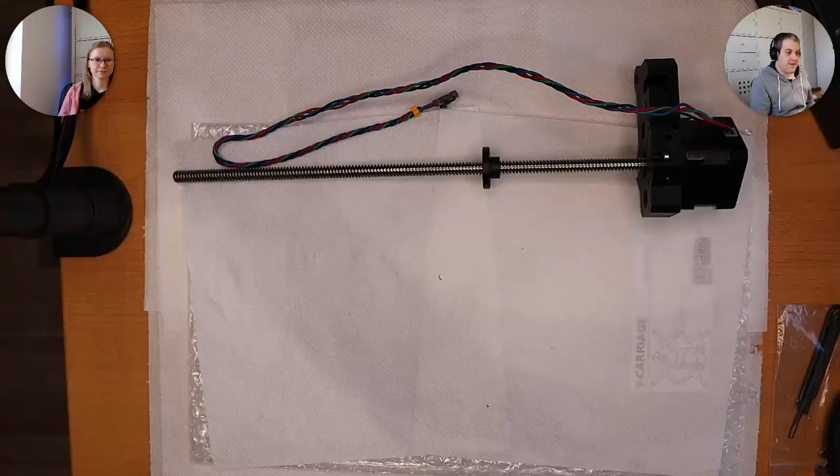Let me switch to the overhead camera, and let's take a look at what we have so far. I wonder if this is bright enough. Let me just do a little bit of adjustment. Where's my ring light? So we have some external light coming in, a pale one because it's winter time. But we left off with, which one is this? It's the motor, Z-axis. I think the X-axis is going to be a separate one.

We're going to show you the manual in a second. But yeah, we left off here after 7 hours. So I'm going to put this one aside for now. I'm just going to place it like, oh, you're going to grab it. So what we have assembled so far is all this.

So we have the conveyor belt here. We did a really good job at positioning and lubricating the bearings, so this one slides. But now because we have the motor here, let me just position this in a better place. Now we have the motor here and the belt moving the bed, or the piece that will hold the bed, is kind of difficult - you need to apply force to move this around. So I don't really want to do that.

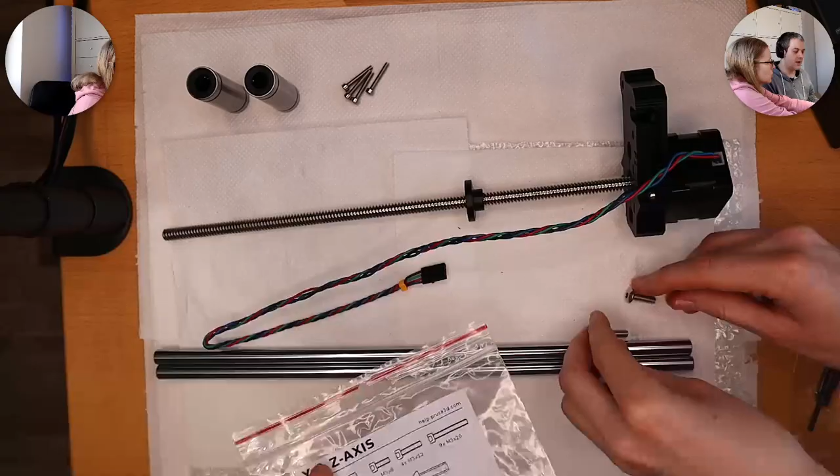So we're discussing the assembly, and at least they have these nice printed labels where the screws should be 1-to-1 proportion, kinda, except for this one. Yeah, this one matches sort of, so I think this is the one. I mean it has a round top, it looks like a Torx. But what the comments say is that they accidentally used these 60s instead of these 20s, but yeah, because they were not paying attention, but we did pay attention. So yeah, I think we only made one mistake with the screws. Okay, so that's it, you have... I think so. Okay, let me just close very quickly.

I wonder what people in the chat are saying. Can you do a refresh on the chat? Just wondering, this is so weird. So we do see folks in the chat. It's in the upper one, the dots. Flip. Okay, that's weird. Maybe they're watching the VODs.

Recording, yeah, okay. So we have the rods, we have the screws, and we have the bearings without lubrication. Okay, oh, these are bigger ones, longer ones. You have like 2 rows in each column. If you look inside, oh, the little balls. Well, these are large, oh it's 2 times. Yeah, it's not gonna be visible on the camera probably. Do you want to try it under?

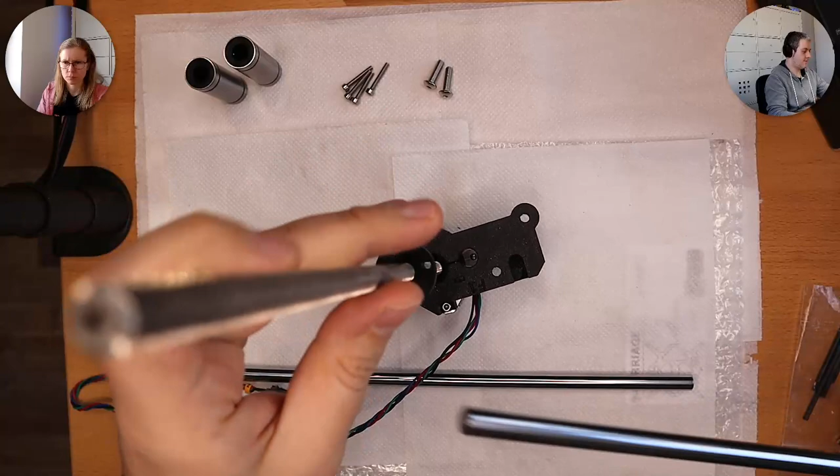Okay, so I need this, and then push it in. In case you find it difficult to insert the smooth rods, you can slightly loosen the screws on the Z plate bottom, and they fit perfectly in, then tighten it again after insertion. Don't forget to tighten them after the insertion. Oh yeah, I'm not there yet, I just inserted the rods.

Next picture. Look at the mini Z bottom from below and make sure that both smooth rods are fully inserted all the way down and touching the bottom.

Oh, we are not showing the picture. Let me just read further. Some early units may have a narrow version of the inspection holes. In this case, it is recommended to illuminate the holes with a spotlight for better visibility of the smooth rods.

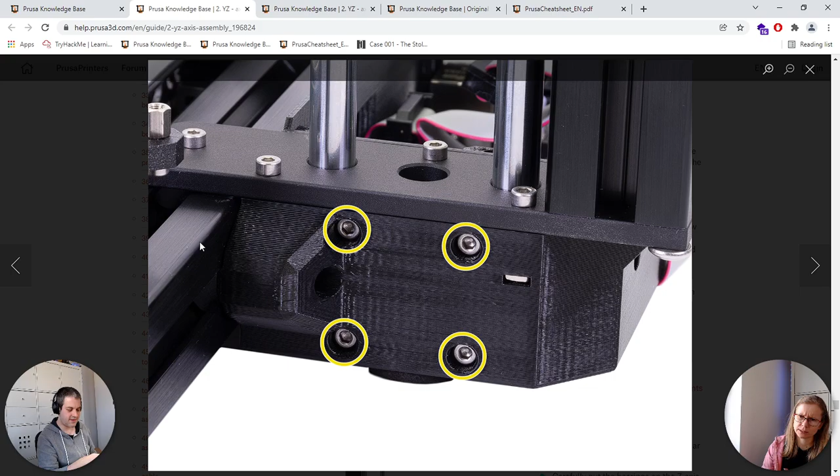So, yeah, let me just... No, but we don't have... This is the bottom of that box. I can see the PCB there on the side. This is not where it goes, this is the top. Okay, we should have inserted the rods in there. Sorry about that. Yeah, there's the PCB, look. You're not paying attention, you're my eyes and ears and you're not paying attention.

I said that's the plate bottom and that's the top, but... Yeah, but you never told me that I'm doing something wrong. No, I did not tell you, but I just wanted to spice up the show. You missed it too, admit it.

Absolutely, yep. Okay, so this is gonna be more familiar. This is gonna be problematic if I insert it in. So the inspection holes, I'll give you the camera. But I would be surprised if this does not feel like it's all the way in, like you can't miss it.

This is a little bit harder to push in. Do you want to loosen screws? What screws anyways, I don't understand any of what they're saying. I think these ones. Those are not holding it.

Let's swap. In the meantime, I will just read the comments, there are 23 of them. Yeah, so it must have been challenging for everyone.

After loosening the top plate, the smooth rods seem to still be catching just after the plate. Once I applied a little more force, it's sliding fine. But apparently it was too much force because it knocked out the thin bit of plastic at the bottom that it's supposed to sit flush against. If I just push the rods back up to the intended lengths and tighten the screws to lock them in place, should that be okay?

It will be fine. The crucial thing is to fix the rods against the side-to-side motion. I would say nothing is easy in this assembly. Even though this seems such a primitive and obvious step, boy, it's not.

There are 23 comments under the tab. I think this should be a clear indication to Prusa that something needs to be fixed here. I have this rod totally stuck. I cannot slide it in, and I don't even see why. There's such a tight place here for the rod, and I do understand it has to be tight, but it doesn't fit. I'm not even sure it fits the hole.

What else is holding this little piece here? At this point, I'm just so happy that we stopped the previous section before this point, because I would have given up this one easily. I'm starting to give up right now, because I don't see how this could ever fit in here.

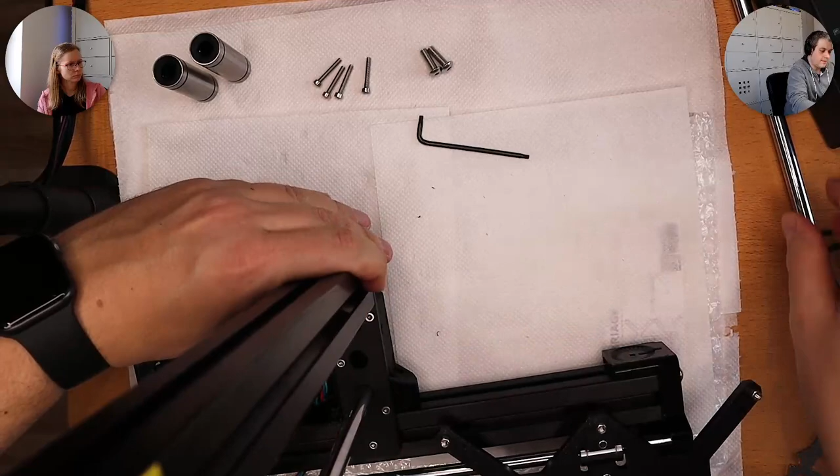It's not getting down, it gets stuck at a point where I should put it into the 3D printed part. So something is wrong with that hole. Why is it getting stuck? Doesn't make any sense though. It's almost perfectly aligned at this point. I don't get it.

I'm going to remove the plate now, but first check the hole to see if you can see the nut inside the plastic part.

Make sure the hole in the nut is aligned with the hole for the screw. If the nut is not aligned, insert a 1.5mm Allen key into the hole and center the nut with the key. I'm not gonna do any of that, I'm sorry.

I'm just removing the whole thing. I want to see if this even fits in the hole, because it's small. This was a large one.

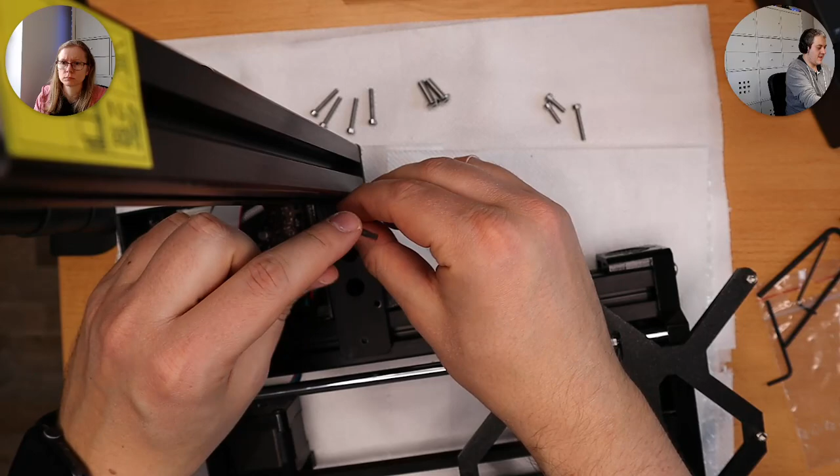Can you also find the part where we insert this plate? Because now I'll have to reinsert it eventually. I think I kind of got it - it's like a long one here, and a short one like this. I'm removing it just to see if the rod actually goes in here, because I think it doesn't.

It does. That is so weird. Okay, then let's try it a different way - what if I have the rods already in here?

The problem is, because of this part, you cannot just place it afterwards because you need to bend the plate. I'm not following. It's okay, I'll...

See, it's still stuck. It's so stupid. The plate doesn't go all the way in here. There should be a screw that pulls this plate in this direction. See, there's a huge gap here.

I'm not sure if you can see it, but there's a big gap here between the plate and the plastic part, and that's the amount that prevents me from inserting the rod. Very bad design, Prusa, very bad design.

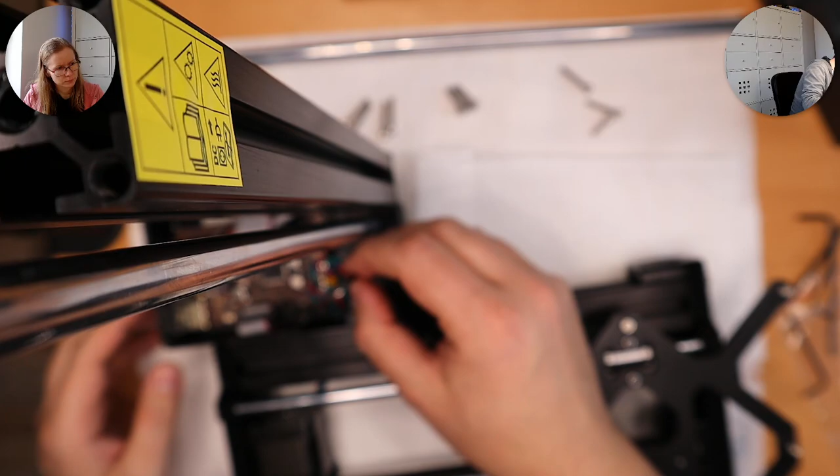What is the... I don't know. I have no idea what to do with this one. Sorry, it's gonna be out of the screen because I really need to insert this in.

You're turning a little bit, you'll be on the camera. No, this is not gonna be on the screen. Sorry, it's just a stupid struggle. I'm not gonna be able to show the move, but the twist... you are, because the other camera is. Okay, yeah, but everyone has to see it like in this angle.

So the trick is now it's really tight, I'm not even going to be able to think. So the trick is... no, don't remove it once it is in. No, it should be fine too. Just very hard.

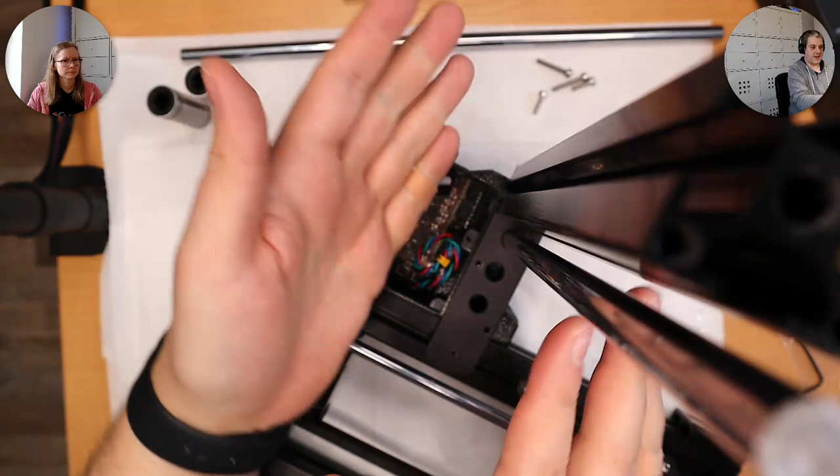So what I did is I inserted the rod to the point where it is just in line with the bottom of this metal plate. Then what you need to do, because of this screw here - well, you cannot see - there's this part, this screw, and you need to put this whole thing at an angle, so the bottom of the rod is aligned with the bottom of the metal plate. Then you tilt it just a little bit, snap it in place, and then push the rod in.

Okay, and now I need to screw in all these with the screw rods and screws there. Now I need to use a long one here, a long one here, right, a small one in here. And then I hope that this metal piece is still aligned with the hole. So the M3x12 screws on one side and two M3x20s on the other side.

Guess what, the metal moved. Yeah, no, it's good, it's in the right line. So this step - very disappointing. All right, we're going to screw back the plate into its previous position.

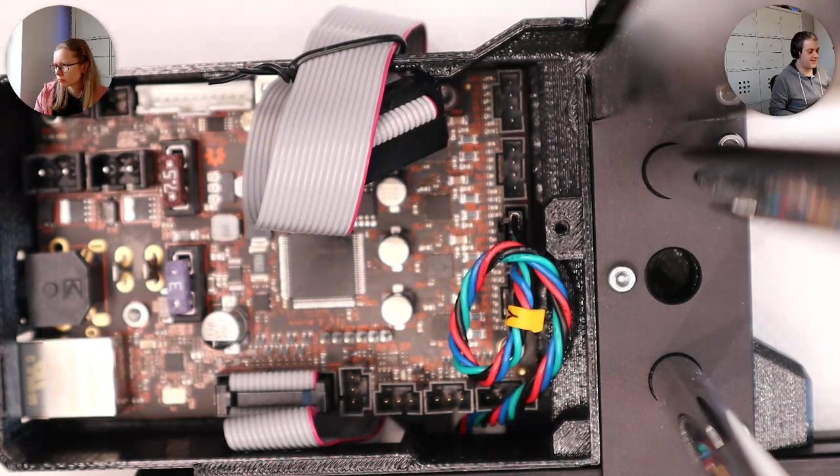Now this rod is so much in its place and so stuck. It's a bit blurry. Do you want to hold it and show it in the other camera? Nah, I mean, not everything has to be on there, but yeah.

Here, this is the gap that I was talking about. How about now? Oh, wonderful. So yeah, this gap is still there, and it's because there's this bottom screw for this metal piece here that's going to be holding the motor, and it's just not fitting there perfectly. And that little misalignment, it's only like 1 or 2 millimeters, but it counts - 2 millimeters is a lot for precisely putting it in place. So that's the difficulty of this step.

Maybe you should add a comment and tell them to align the rod with the bottom before you screw it in. No, I don't take responsibility for that. I think, is it like on the picture? The bottom - yes, you can see both of the rods.

Yes, can you please show that into the camera? You want me to show things to the camera all the time? It's not gonna be visible. Anyway, we're just checking what's in the manual. I do confirm. I just want you to look at it and check.

I can hold it. I can check it too. So just point out, please, what we were checking, because I can't do it on the camera. Where is it? Okay, yeah, I can see them. Can you see them? It's awesome, wonderful. I just don't want to have the screw falling out that I didn't put in place.

I think this step should have been done together with the insertion of this piece and the metal plate - it's way easier in that case. It's really like one little jiggly move and it snaps in. I think it's not even the design - well, the design is also not ideal because I can still see the gap, but it's more the instructions that I would change, like insert the rod together with the metal plate. It's gonna be much easier.

Loosening the bolts doesn't help because the screw here at the bottom is the one that pushes it towards that direction, not the screws here. Anyways, it's cool. Once it's in there, it's awesome.

Okay, and they are approximately the same height. We're starting to have a little tower here. Oh no, they are the same height. Yep, exactly. Okay, what next?

Screws. Oh, here on the side. The 20s. Yeah, but on these the four. Side here, yes, these big ones. Let me just check it. Look at the minis at bottom or from below and make sure that both smooth rods are fully inserted all the way down and touching the bottom.

Oh, we've done that. Am I doing this right? I use this Torx for almost every screw here - I'm not using anything else, just this one. Secure smooth rods with 4 M3x20 screws. Yes, the 20, the longer ones. And actually, this might also help.

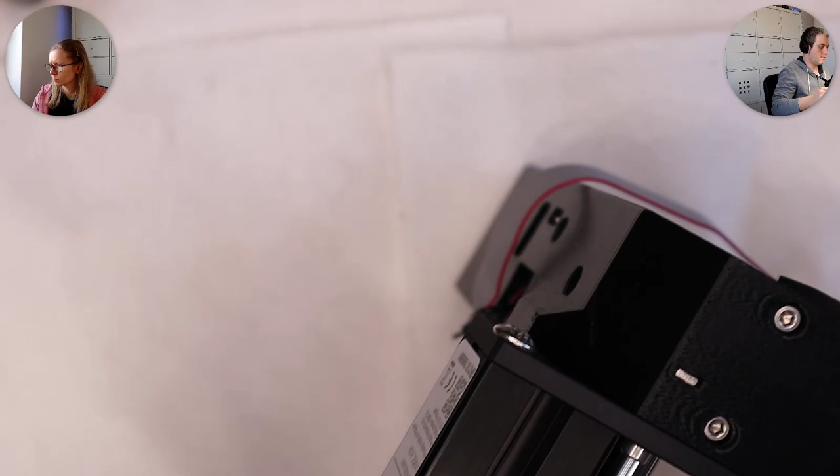This is not in its place. Let me know if you need a hand. No, good.

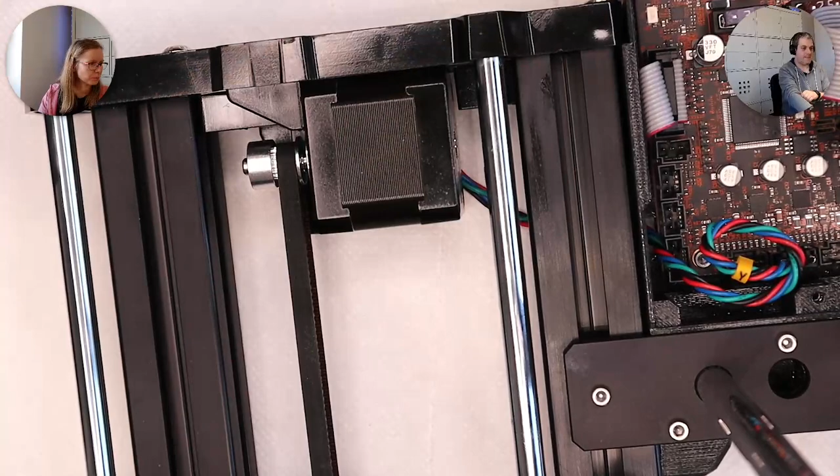How is it possible that even just putting in a couple of screws is... Oh, it is getting bigger. No, it's not plastic, it's just that they don't fit. That's not good. No, it's not.

I think I know what's the problem. Probably need to push these ones even further. Oh, this is gonna be very, very hard like this. I don't want to break this one.

Okay, I have bad news. We probably have to remove the plate again. Unless there's some sort of miracle happening here.

No. So there are these little squares. I think you are... for the follow. Yeah. Hey there, how's it going?

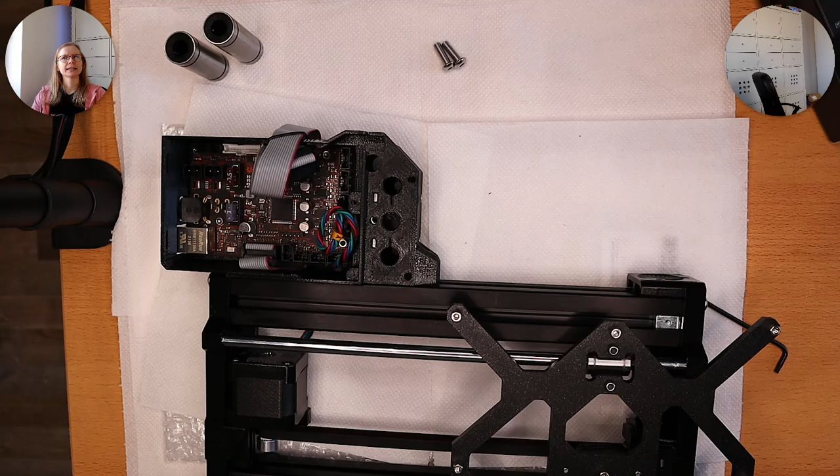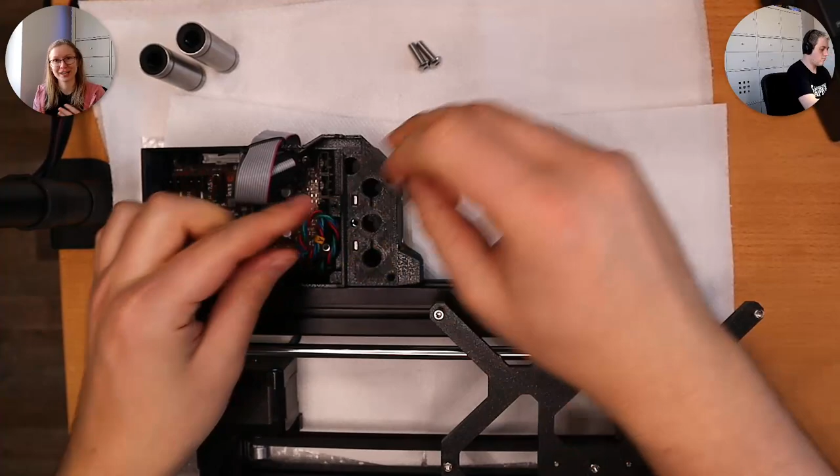So it was very interesting to include other experts of other countries, and those experts also took a look at the evidence, because apparently the Americans - both the Russian and Chinese experts - were also biased when they analyzed this conflict. The important part for the Americans was to make predictions of the outcome of the situation.

What was a very common issue, and I think that's also very human, is that when you don't know a culture - an issue with, for example, CIA analysts - for safety and security reasons they will not move to the country they are analyzing. So if they haven't been there or lived there before, they will not know the culture as much as someone exposed to it for a longer period.

This is why there are these biases, when we think, okay, what would we do in a similar situation? Cultures are different - spoiler alert, cultures are different - so you cannot just apply your mindset, your culture, your country to a situation.

And on a smaller scale, I think that applies very much to security analysts. From an IT perspective, if you're new to an environment, of course you bring your biases from your previous experience, but you have to keep an open mind - and it's easier said than done - for such cases.

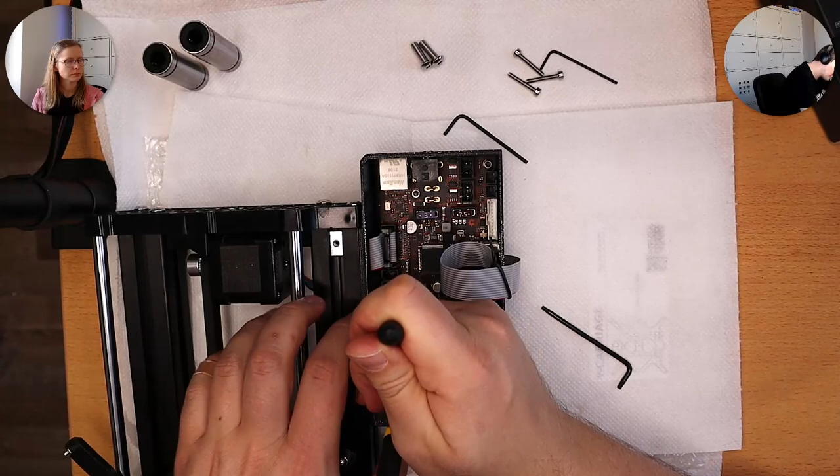I'm not sure, I'm just struggling here. I tried everything, now the screw doesn't even come out. So yeah, I'm pretty much stuck now. I don't even know what to do.

Then I keep talking about biases. In the book they say, if you think about it, it's pretty straightforward: your personal experience, what you've seen, heard, learned, is much more important than abstract data when you make a decision. The statistical data is probably more reliable, but we tend to give less weight to the statistical abstract data than to our personal experience. So that is also an analyst bias.

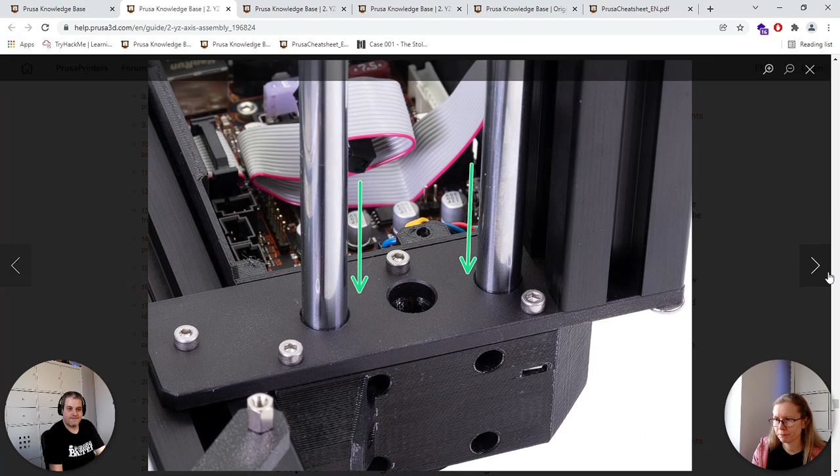Okay, now what? Let me just switch back quickly. So, yep, we've seen this. I'm not gonna turn it. Okay, the rods will stay here. The screws are properly in. They're okay, they're properly done. Okay, then let's move on to step 56.

Yeah, oh that is better. Installing the Z-axis bearings. So you should position your setup this way. Okay, so turn the Y Z-axis assembly with the rear side facing you. Okay, wonderful. Next, carefully put the bearings on the Z-axis rods and slide them down.

Does it matter what's the orientation inside? Do they have to be pretty much the same? Do you want me to read the comments? Yeah, because we have the lines here for the plate. We had to pay extra attention to align them properly. That's why I'm asking, is there any sort of alignment that I need to follow?

Not here, let me just check the next step. By the way, I don't get what's the reason why you have to align it so perfectly on the plate part, because those are little balls in there, and the rod should slide no matter what the orientation of those lines of metal. Okay, so it says balls in there. Slide the bearings to the upper edge of the smooth rods and hold them by hand with the other hand positioned. Okay, now it's the mounting. So no, I don't see any instructions.

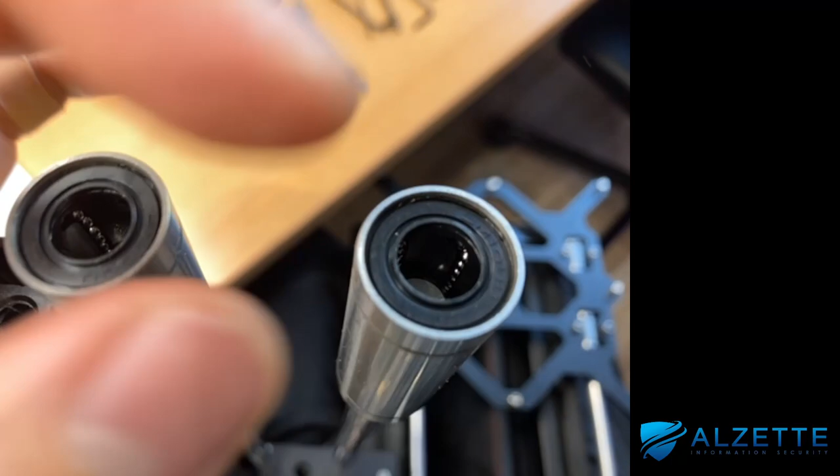You see the little lines here with the balls. So I tried to have them almost aligned the same way, and I just slide it on. And you can actually see how the little balls move here. Can you see that? It's so cool, can you see it? I think it's visible, kind of. So inside, you see how they move? Try to focus on it. As I move it, you can see the little metal balls moving there. It's not visible? I think it's there. Anyways, or maybe like this. You have to trust me on that. It's a little bit too dark. But anyway, so that's what we did, and the whole thing is on a mount now.

So that's... can you switch back to the documentation maybe? In the meantime, I will place my phone, and I try to untangle this cable. I need to charge my phone, so I won't be able to do it wirelessly.

So that's the idea. Do I need to just push them down or what? For the time being, yes, but then you will have to bring them back up to the top. I don't know why. What's the point of pushing it down? I'm not sure.

Maybe it's because we insert the platform motor or something. Look, I'm going to gently push them down. We cannot see it, it's not gonna be visible. Everything I do with this axis won't be visible, I'll have to show you.

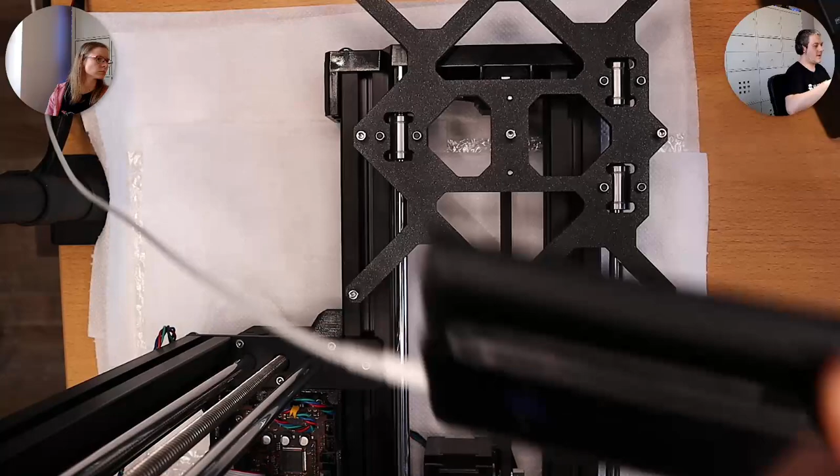Anyways, it's really about me placing the thing. Oh well, can you switch to the phone? So yeah, I can just turn the camera. Why, because you're showing my mess on the other side? It's fine, the whole thing is a mess. Look, that's what I call cable management there.

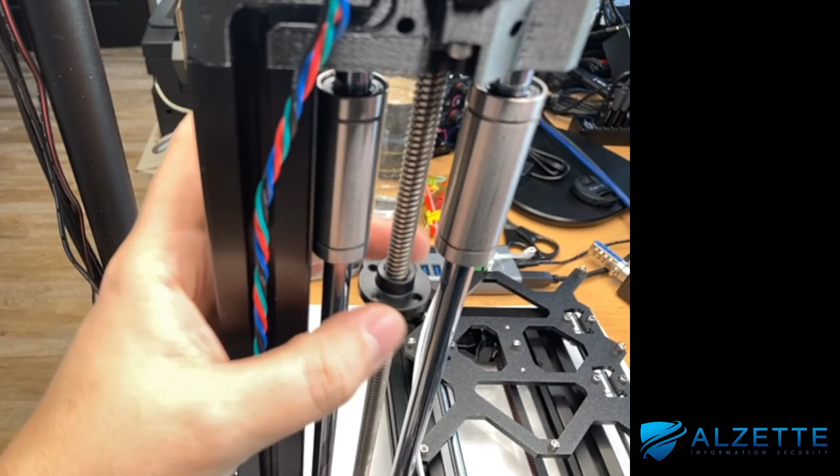So this is here, and we have the plastic thingy coming to the - is it supposed to be? You're supposed to put it - is it supposed to be like this? Put it on, look like this. Yeah, this is correct, like this.

So the two bearings are sitting on the plastic thing, there's no gap here. The cable is over here, and the motor, and everything is very dusty because we let it just be around. Sorry about that. So that's what I did.

Inserted - wait a sec, because it's still focusing - so inserted the rod of the motor. It's kind of wiggly, so I hope that something will hold it in its place on the bottom as well. And that's it, this is here. The motor position should be fine, and I think what will happen with the cable, because I see the gap here, it will go down here and then get connected to some of these.

So these are all for the motors, this will be the power supply for the motor here - at least that's my guess. Okay, let's switch back to the documentation, see the next step.

I will try to use the phone camera because the overhead one won't be able to show you all the steps. Okay, so we are done with this part: mounting the mini Z top assembly. Secure the mini Z top with the two 16 screws. Those two remaining.

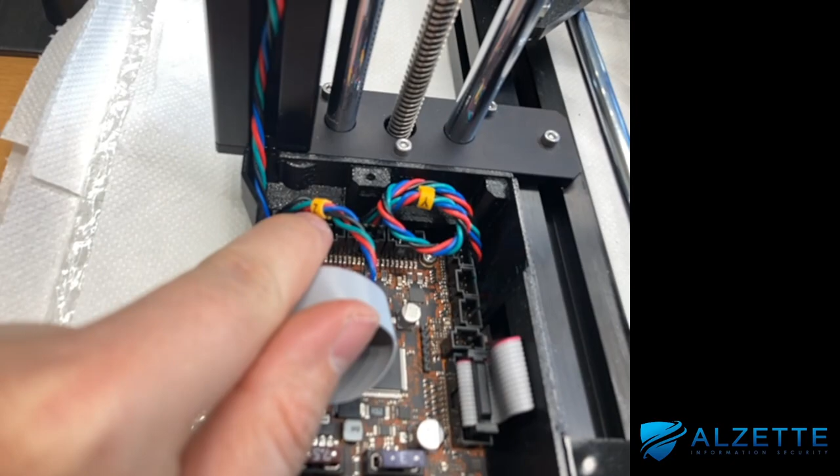Can you switch to the... okay, so there, it's not great, I'm horrible at cable management as you can see in the background. But we have it here, and I really like that they have a little label here, so it will be easier for us to identify if we need to disconnect the motor ever. Let it never happen, because then we need to remove the whole thing and get off this motor here. I mean, changing the motor shouldn't be that hard, we only need to unscrew these, and there's one on the other side as well.

Yeah, awesome. So the idea with this is to print a couple of the cases, so can you switch back to the documentation so we can see the next step, and protect the PCBs. That's pretty much the main reason why I want to have the 3D printer. And also some replacement parts, or maybe if we have a design for a tool and we need a plastic part or a case, then this will be great for that. But my main goal is really just print cases. It's pretty boring, but that's the security relevance.

And I think today it's kind of important to have, even though this is a hobbyist printer, I think it will serve perfectly our needs, at least for the beginning, until we get a better understanding of how 3D printing works. Okay, this part here, this has been around forever, and I really wanted to put it somewhere.

Is this to hold the cable in place or something like that? Let me just give you these two, these are the last two screws. Are we approaching the end of this part here? And then we have 6 more to go, or something like that.

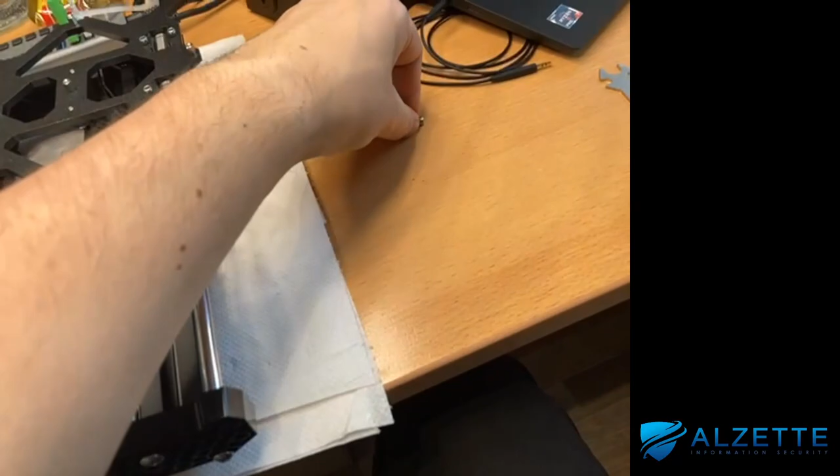I wonder why it's not all the way down, because it's kind of weird, it's only halfway there. And on the other side, you say there should be... no, look at this. Yeah, but that's the other side. I'll just put this down here for a second, and turn the whole thing around. Oh, like this.

Okay, so these two here, these two screws, these two holes will support these two screws over there. Okay, so I will just switch... the overhead camera, I think we're not going to be able to use that until we work on this axis. All right, any other further steps for this one?

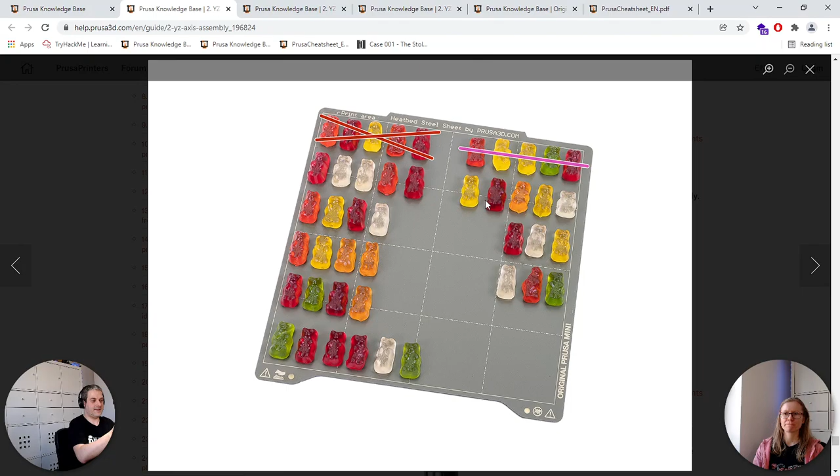Do you want to have a gummy bear? No, thank you. Oh really, just one? The red ones are the best. So what's your opinion, which ones are the best gummy bears? I like the red ones. These are the worst ones, the orange ones, just the taste isn't my favorite. And then the yellow ones are also cool. I'm not sure if I have to do the same color. No, you're only allowed to eat 5 of them, 2 reds, 2 yellows, and one green. One is in my mouth. I'll keep the red ones, most of them for last.

I wonder if gummy bears are also illegal in certain places, like Kinder Surprise. No, Kinder Surprise is illegal because you're not supposed to eat edible and plastic together, which makes sense. But I do wonder if this is a representation of the difficulty of our task. Oh no, so at the end... No, I think that's the final reward probably. I think these are the harder ones. We used a lot of components already, and there's only a few additional components here, so I think the next steps will have way fewer components, hopefully easier assembly. I don't know.

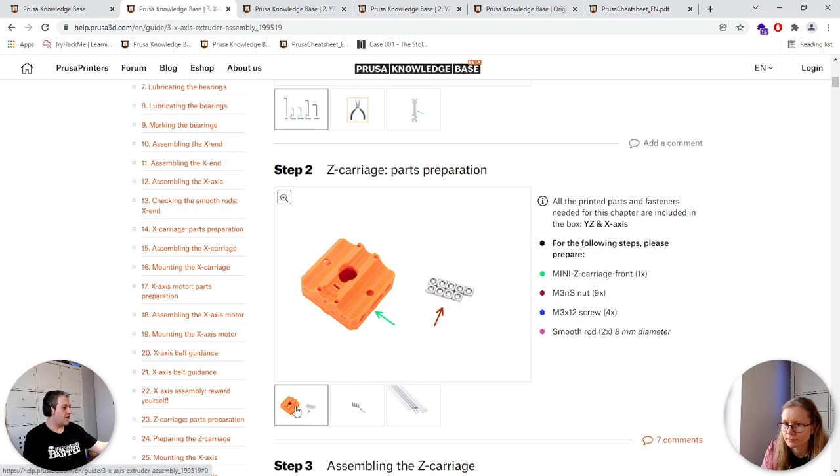I still don't get how this one works though - what is that? That's the y-axis, the z-axis rod. I still don't understand how it's going to be fixed here, because it's still a bit loose. We'll see.

I also don't really see how - maybe it's the x-axis that will hold everything together. We'll see. Or maybe it's fitting like this. My guess is we'll see it in the assembly, but I think these parts here will go for the big bearings, and then it holds everything together.

So you will end up with a high understanding of the functioning. Yeah, that's what we are aiming for. Next printer, I'm just gonna buy it assembled.

If you're ever going to have another printer, a Prusa one or anything like that - well, maybe if we go with the larger one, they have the Mark IIIs, that's more professional grade. This one is more of a hobbyist printer, and like I said, I think it's gonna be just fine. But the next one, I'll definitely buy it assembled. This is a lot of fun to do once, like playing Lego, but yeah, next one, I'm definitely not doing it myself.

Okay, here. So, which time zone are you in? Yeah, we're in Europe, so Central European time. For us it's 2:30 in the afternoon.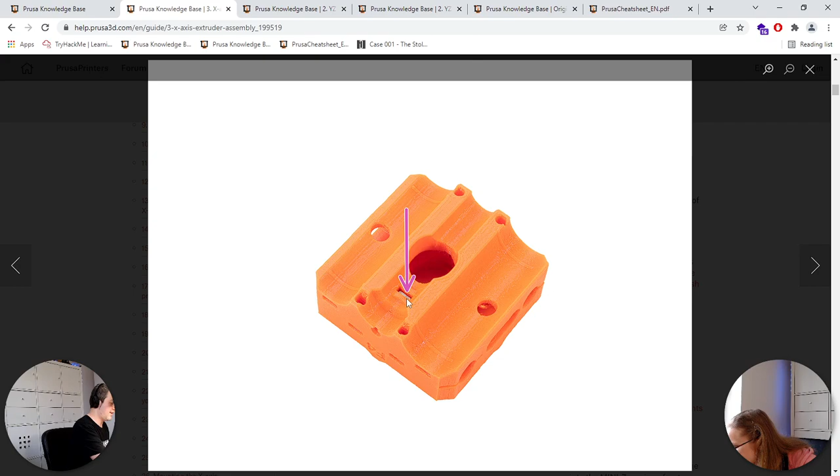I see the mountains through the window and the sun. That's good enough for me. I'm not so much an outside person.

Oh okay, it must be wonderful. But still, if you ever feel like going outside and enjoy the weather. For us, it's the summer that is hot.

I'll do the insertion while I'm talking, and then you can see it. So all these paper towels, normally we have either a solder mat or a gray mat, but we were warned that there will be some more lubrication involved with the bearings, and I didn't want to mess the whole thing up. So we just put some paper towels, and I use one of the bubble wraps here for the Y carriage to have a nice, not too hard surface, so I don't scratch the metal parts. Okay, so I start with this one here.

Look at the cut, this is so good. So I have, I think, 2 different kinds of orange filaments. I'm gonna print everything in orange because I look at how awesome it looks. So we are orange, and Hungary.

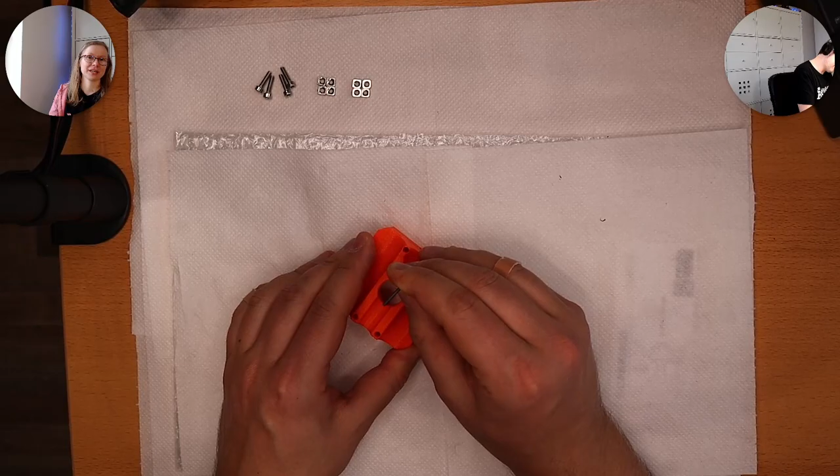Normally we have 4 seasons here, so winter is cold and summer is hot. And in between we have spring and autumn, which is very nice. But in recent years, summers have gotten hotter and hotter.

So insert 4 nuts in the top side of the mini Z carriage. I think it's front, this one. Yeah, because that whole face faces downwards here. But okay, and the next step is to do the same thing here as well, isn't it? I just want to see all this. Yep, so insert all 8 of these here. All right, that's all I wanted to know.

Thank you, because this will take some time. Okay, then sorry for interrupting. No, go ahead.

I would love to go there when it's cold. I've never felt anything below 17 degrees. Wow, obviously I don't know snow either. Snow is fun, 11 degrees below zero is not fun. So we had that last week, and it just hurts.

It hurts, so even if you wear gloves, for example, we went out for a walk, and I only wore my city gloves instead of my ski gloves. So after a while, you just don't feel your fingers anymore, and you try to move them to get some blood moving in it.

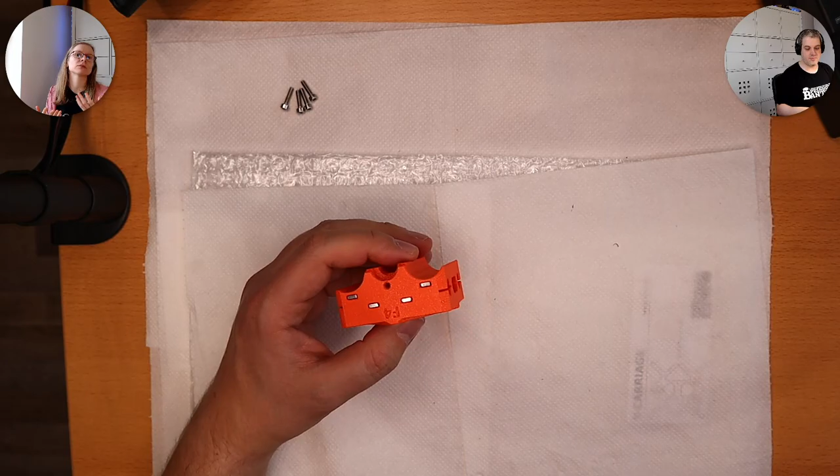You can get completely fresh water from underground, but we don't live in that part of the city. Those people are very lucky; they have great water. But I think we get it from a river, so it's artificial cleaned water, not directly from the source. This is why the tap water is still drinkable, but it doesn't taste as good.

I drink the tap water, I think it's perfectly fine. In Hungary, I think the tap water quality is pretty good, but they put a lot of chloride in it, so you have to wait a couple of minutes so it becomes transparent after it's white.

Okay, I have all these inserted. Anyways, just to finish the story — we pull off, we see no one around, so we're like, yay, we're gonna be able to fill up the water bottles.

And then 2 cars just roll by. Everyone is like, oh no, quickly. And I'm the fastest one. We already been there once, he was already laughing about this, but I don't want to waste more time because we still have to do some shopping. So I jump out of the car, get in the trunk, get out 2 of these plastic cans, and I rush to the source.

This happened just last week. In the mountain and the forest it's quite cold, and around the water it freezes. I do know that, but in this big rush I didn't pay attention. And it was already dark, after sunset, so very dark.

I have 2 of these plastic cans in my hand, rushing over there, and I slip. I couldn't even roll out of it because I have these 2 plastic things in my hands, so I'm just like a frog. And I scratched the skin off my hands, so that's why I don't want to show it, because it's quite ugly.

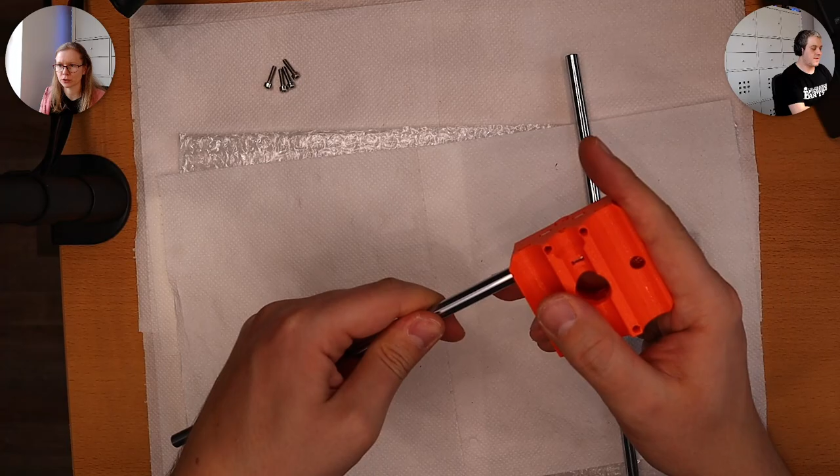Okay, I'll let you check the next steps for me. Here, these are with the rods, just let me know what needs to be done. So read the instructions please, and then carefully slide, see both what's there, smooth rods all the way into the mini carriage. Yeah, silently, because then I won't be able to explain.

Okay, thanks. So on Mondays we do more blue team related topics. Yesterday we did the DFIR Madness Stolen Szechuan Sauce case. I don't know if you heard about that one. It was done by a DFIR professional, James, and he was kind enough to create this as a community resource.

So you can download the case files and do the analysis. Yesterday we did the PCAP, and James saw the Go Live advertisement on Twitter, so he also jumped in and looked at the last part of it, like the last hour or so. This happens way too often, so next time I'll reach out to the person that created the project or resource we've been working on or plan to work on. I actually wrote a direct message to James asking if he wants to come for the next stream and get into a call and explain how he did it, why he did it, things like that.

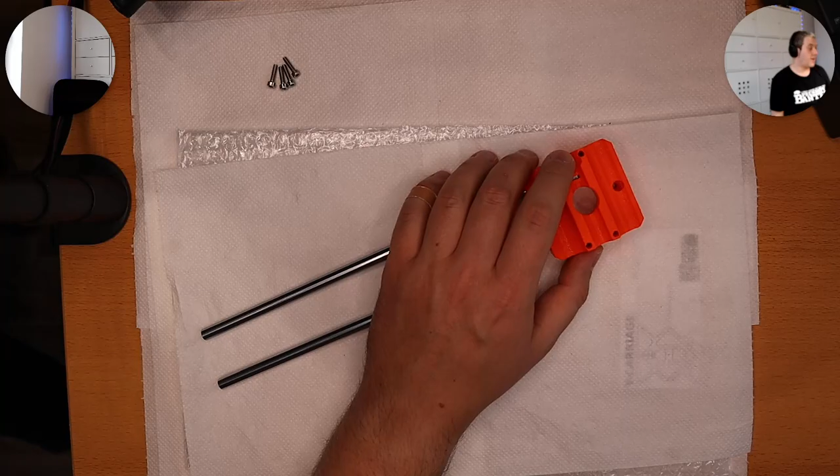Then Wednesday, so tomorrow, is more Red Team or CTF kind of stream. We've done 2 so far for Flaws. It's a CTF game, online cloud CTF, created by Scott Piper, who's a very well-known AWS professional. He created these 2 CTFs as a challenge that you can take and learn about AWS security. I think the VOD is still under the videos on the channel.

And then Fridays are more hardware, either hardware assembly or hardware hacking. We haven't done that much hardware hacking yet, but for example in the one before the last one, we assembled 2 little Wi-Fi devices. One is a Pwnagotchi and the other one is a Pi Sniffer. The video should be still up and you should be able to watch it.

We kind of try to keep the schedule. There's also one because we're Hungarians and we want to also give something to the Hungarian security community. On Sundays, we do a very beginner-friendly stream, doing some very, very easy TryHackMe paths in Hungarian. So that's pretty much what we have.

You can see the schedule for the channel, and we try to include it in the title of the stream if it's blue team, red team, or hardware related. Last time we did start the assembly of the 3D printer, and we need to catch up with the schedule, so we have these additional bonus streams for today and also on Thursday. Usually Thursday and Tuesday are our day off when we do other work, like running a security consulting company, and that's where we mostly try to catch up with the hours we spend on streaming.

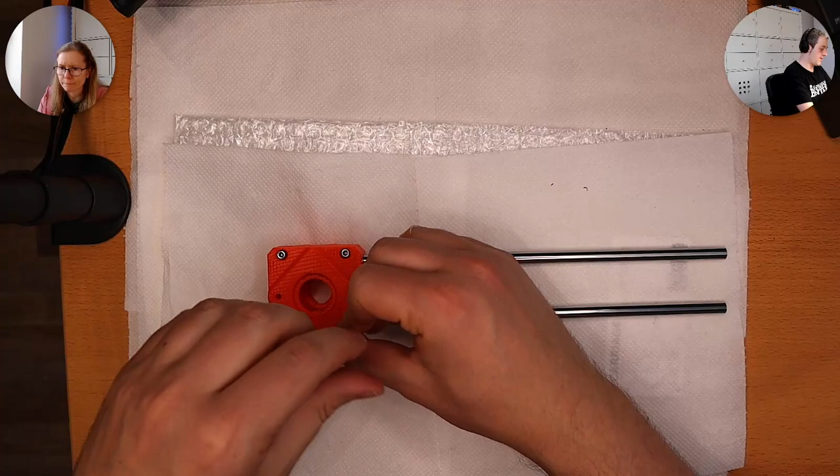How are we doing time-wise? It's almost 3 p.m. Okay, that's not bad, we still have like an hour. Afterwards we plan to go out to the forest again, and before that we have a meeting - there's a project meeting.

In the meantime, I will just collect the screws and nuts for the next step. Yeah, that's a good idea.

I do like this color, it's really nice. I think you can pick what kind of color you want, and I picked the combination of black and orange. So nicely, I don't want to tighten them too much.

Oh, you're already done. Then I will switch back. You're so decent. Oh, the list continues in the next step.

Need 4 of the 12. It's interesting that some of the 3D printed parts have a lot of these little threads, almost like hair, and some of them don't. I think it's different printers used to print the different parts, and maybe this printer is not set entirely well.

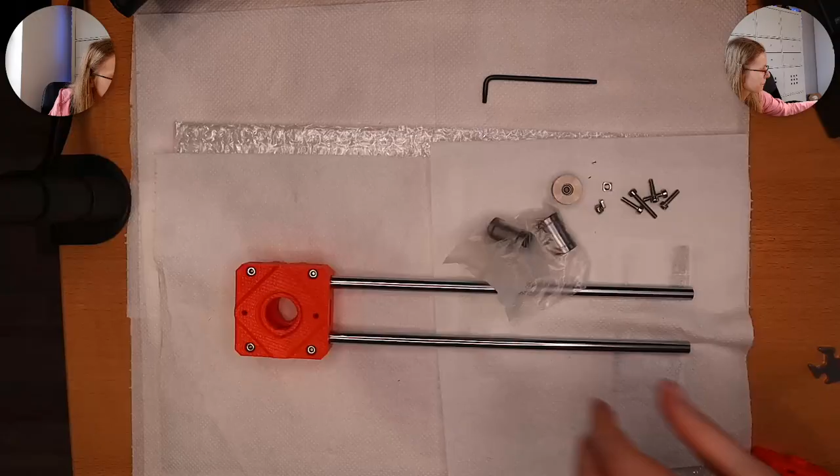Each bearing must be lubricated before mounting on the printer. Follow these instructions carefully. Let me get a bearing and a couple of these paper towels here, because last time we did these - do we start with the bearings and the lubrication? I'm afraid so.

Use any piece of fabric to protect your working surface from grease. Make sure the bearing is clean inside. Wipe the preservative oil off the bearing surface with a paper towel. It is necessary to lubricate all 4 rows of the balls inside the bearings. Actually, with other bearings, we've already done that - we started the whole assembly with that, so now we know that.

What kind of permanent marker do they need? I have a couple of these here. We don't have a picture of that - is it just like a thick one, a thin one, blue one? I have 3 of these, I can read the comments. And I also have somewhere an actual Sharpie, I just don't know where.

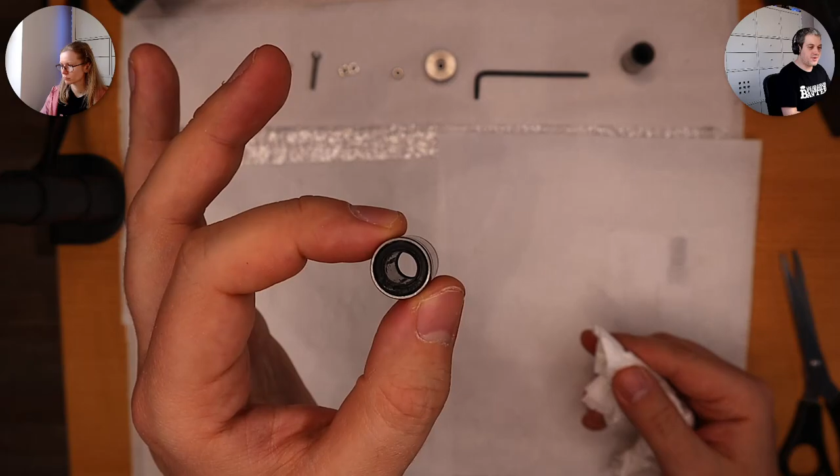So I need to clean them first without hurting the little balls inside - those little metal balls in a row, you have to push really aggressively. Some of the people commenting here managed to do it differently.

I mean that in the description in the assembly guide, some people managed to complain that they pushed it. Apparently, if you lose one or two balls, the printer should still work okay. After that, you should just order a new bearing.

But a good thing is they're probably very prepared for this. Maybe they should put an extra bearing in the package. But these are probably one of the more expensive parts, because manufacturing these is probably a more difficult thing.

It requires, I think, a special assembly line. So this is, I would say, good enough.

Most of the oil is gone, but it's kind of a weird step because you remove the oil and then you apply the lubricant. So it was greasy before, but it's very important. Why do I have to do it again?

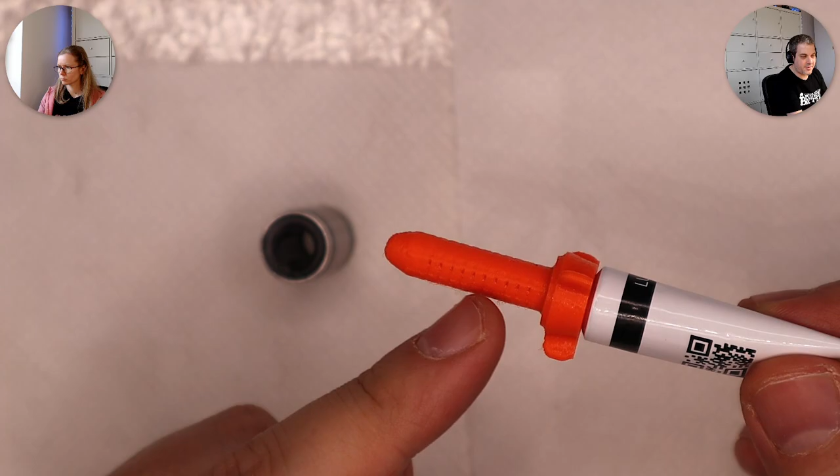I just slid in, I can show you. I need to align this pretty much with the holes in here. I'm not sure if you can see it, but this applier, or what is it called, has these applicator holes in here, and it's kind of hard to show it.

You might be able to see the row of these metal balls, and I kind of have to insert it so they are aligned, because the whole goal here with the lubrication is to have these two aligned and lubricate the little metal balls here. They really should have picked a different color.

Well, I will try to - sorry, I might have to do this off camera because I do it precisely in a way. It's a turn with the tube and applicator clockwise until you feel a slight resistance. Clockwise means the holes in the applicator are aligned with the ball row.

Okay, so then it doesn't matter how I do it, because this one turns a little, and then this is stuck now, so I can just squeeze, I guess. Gently press the tube to push the lubricant into the ball rows. Some material is coming out around the applicator here eventually.

Look at the front of the bearing. When the applicator pushes the lubricant out around the black gasket, stop pressing the tube. Hold the bearing with the other hand during the lubricating. The grease must be spread evenly over all 4 ball rows inside the bearing.

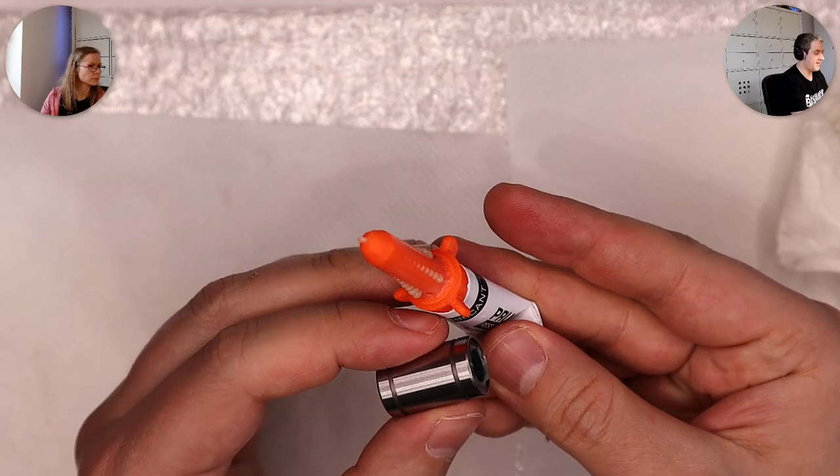Now this one will probably have way too much on it. Yeah, oops, see? This is what I did the first time. It's a bit... I wonder if I should pull it into the other one and just have like... Yeah, because we can never have enough. I can always wipe it.

The other side, just a little, and I will just clean it up on the sides. This one too, yeah, I think I just pushed way too much. Yep, it's all over the place, a little bit. Another one. And when I place this rod on it, I'm probably gonna have even more coming out on the sides.

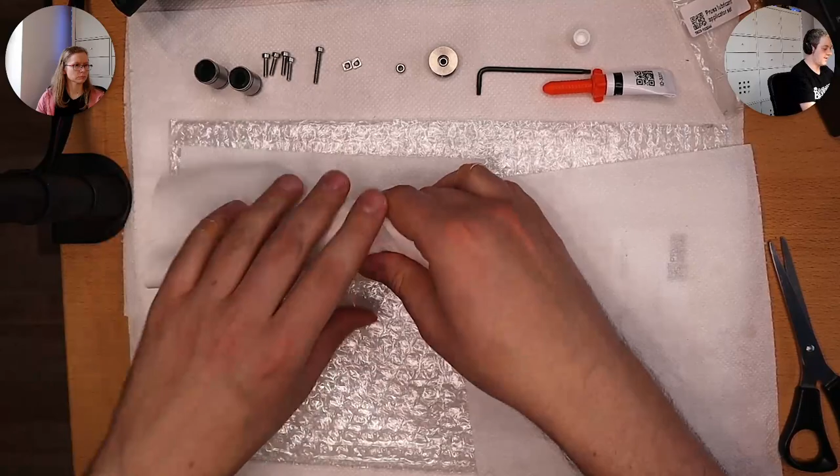Yeah, I think this is looking pretty good. Oops, yeah, probably going to replace these ones now. There it is, we'll just wrap this thing up here. We'll also throw away this one. Have some clean paper towels, I think I just have the right amount.

This, and I'm going to wrap later into this one. What do you think? And tidy. This time we didn't see a notification that we will use it later, so I'm not sure if this is the last step. I'm gonna close it up, and if we need it again, I'm just putting it like this as much as I can, close it up so it will not dry out or anything, and probably put this into an even larger one.

Okay, so lubrication done. What is the marker thing doing there? So it says position the bearing so you can see 2 rows of balls, like this in one picture. This should have been done in the first steps as well. Why? It would have been easier, so much easier, applicable there as well. Ah okay, I'm gonna use a Sharpie to make a mark with a permanent marker on the outer surface of the bearing in the middle above 2 rows of balls.

Okay, use the same procedure on the second bearing. We will use these markings in upcoming steps to achieve the desired bearing orientation. Okay, this is pretty tricky with the one that I lubricated almost perfectly, because you can barely see the rows. But I think this one should be good. I have a little black mark here on top.

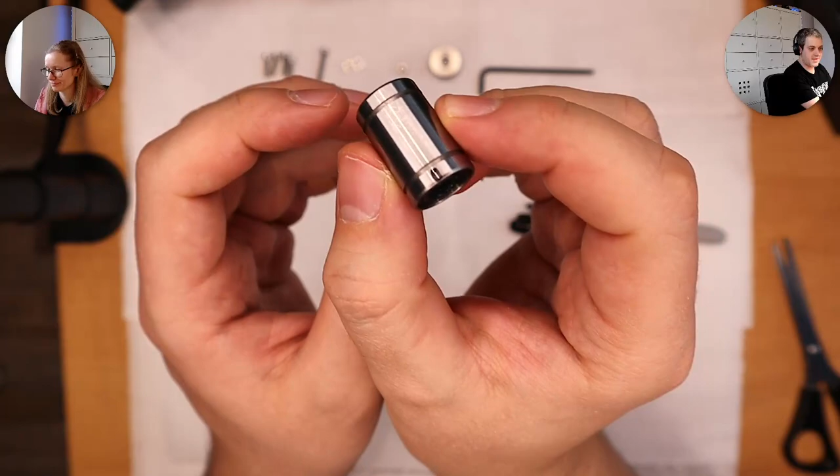I would still recommend doing this after wiping down the bearings and before lubrication, it's one of the comments. Yeah, that actually makes sense, that makes a lot of sense. Came here to say that, it's harder to see the balls after the lubrication. Exactly, like this one is really, really hard. I'm sorry, I'm going to do this off camera because it's so hard for me to see the...

This step would be nice for the Y carriage assembly as well, but it's hard to see the balls after doing the lubrication. They said at the beginning that they've read all the comments twice and found very good advice among the comments. Yeah, but this is way back at the very beginning of the assembly, and it would have made it much easier. I did a few days ago.

This is from a year ago, but it's a different model, so apparently they didn't have that. You're done? Yeah, I'm done. Wonderful, I have these ones.

Oh, well, more or less. But I don't think it has to be perfect. Okay, so assembling the X end.

Insert the two M3 nuts in the X end. Always make sure that they are all the way inserted into the part. Insert the M3 nut into the X end. Use the screw pulling technique.

I will just switch it over to you. Yeah, so doing the usual thing. I'm gonna put the bearings. Doing the usual thing.

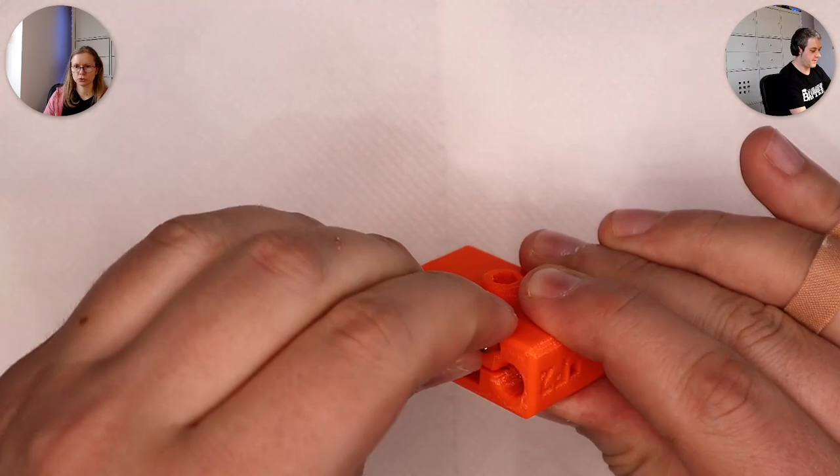And pushing these. I'm not sure what is happening here, but there are 17 comments under this one, so I will just take a look at that. And these are long ones. Okay, I will read them in silence.

Oh, you can read it out loud. Okay, I placed the nut on the correct side and threaded the screw into it to pull it into place. But when I went to remove the screw, the nut was bound up and began to spin inside of the X-end part and would not unscrew out from the screw. Now the X-end is stripped and I will need to remove the plastic collar around the nut to get the multi-ratchet on it and hold it to unscrew for the insertion of the pulley.

I think that this comment came back from later because it's now talking about the pulley. The X-end part seems to have a problem around this nut. Do you have a replacement part or a suggested improvement?

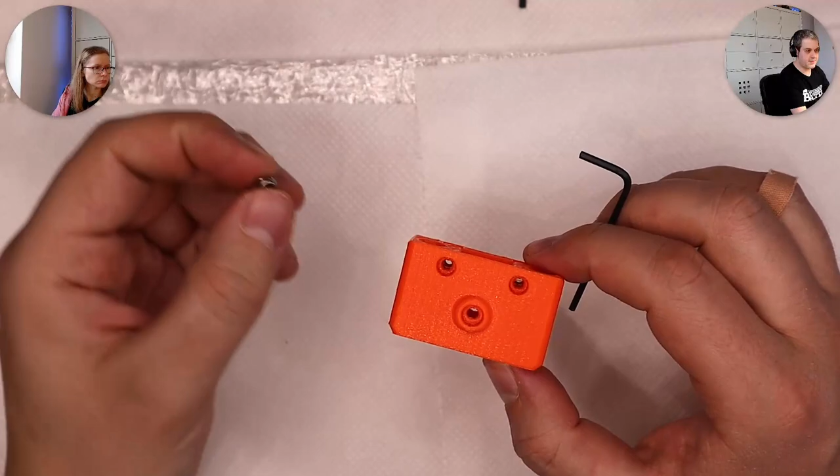Hi Kevin, the replacement part can be done. I have a question. You only gave me one of this little piece here, but isn't that the one that goes on the bottom?

No, I think that it's on the other one. This one looks way too smooth for... Let me just check. Are you sure that this is the right piece? I don't have anything else which looks like that.

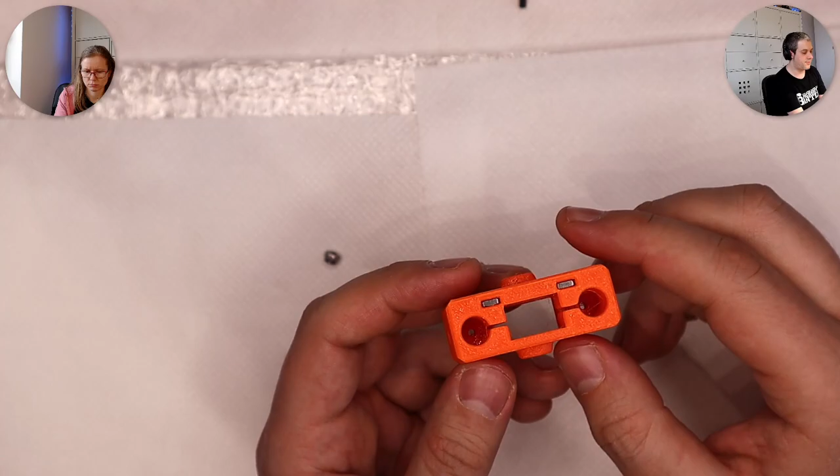Yeah, those look different. Okay, so but it's then on the flip side. These ones also have... yeah, but these are holes for the...

Can you go back, please? Previous one, previous picture of this step. Yeah, which one? It's here. I think the other one is... it should be the top one here, because otherwise... yeah, no, I got it.

Yeah, I think I figured it out. It has to be this one because this hole has the right shape, and the other one is smooth, it's just a round shape here. So, you know, kindergarten level. Yeah, let's do it.

So, can you switch back to the overhead? So I inserted these two here, as you can see, all the way. So should be able to get a screw inside. And this one has the hexagonal shape.

Is it the hexagon? It's hexagon. And just like this little piece here, because the other side is just smooth. So pretty sure it goes in like this.

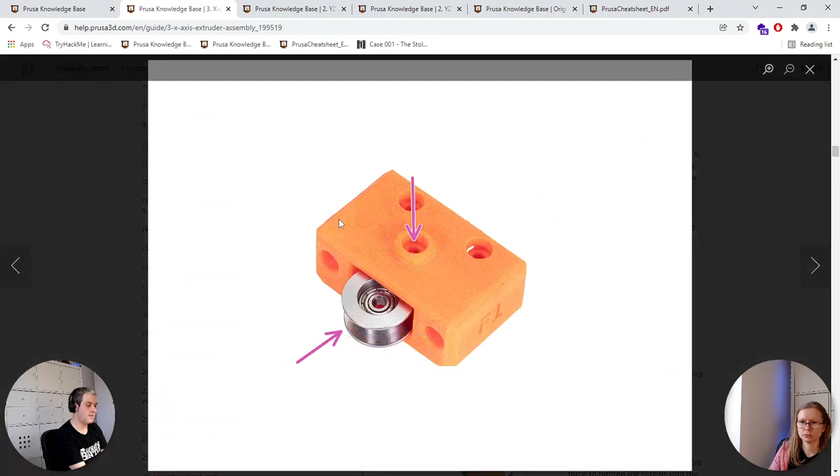It says insert. Inserted. Oh, next step. You've done? Yeah, okay, then let me just... which one? Turn the axis upside down. So yeah, okay, I got it. So you just flip it, yeah.

Place the pulley bearing idler into the X-end and align holes on both parts. The orientation of the pulley doesn't matter. Okay, done? And then yeah, and then just that's it, like insert.

Yes, and then secure it with the M3x20 screw. Wait, this is the long one, right? The long one is yeah, 20. And then place your finger on the bearing and ensure that it rolls freely.

Yeah, yeah, okay, so this one is here. I'm gonna flip it. Take the pulley. Orientation doesn't matter, but I'm doing it the same way as the picture.

And this is aligned now because my Torx just went through. I'm gonna carefully pull this one out and take the long screw here. And this has to meet...

The other side. And once it's in place, we're going to check if we can still turn the pulley. Something is off, not sure what's happening.

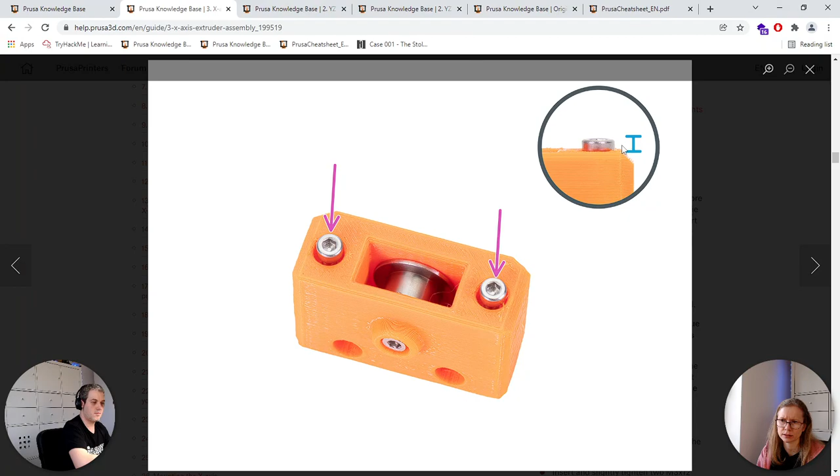Use more force to tighten the screws into the plastic part. Be careful not to hurt yourself. Do not tighten the screws completely, leave half of the screw head protruding above the surface of the plastic part. So if you can see here, like this. You really need to apply force here. I find this one weird again, and not something easily done, because you really just drive it into the plastic, essentially. I think it's a step that's not thought out well.

Okay, starts working. I should drive in the tip of this screw in now. So how much should I leave it out again? Like this much or? Yeah, I think it looks just fine. I will do one more round or something like that.

Like this. Is there anything happening outside? Yep, always. Oh, it will be soon rush hour. Yeah.

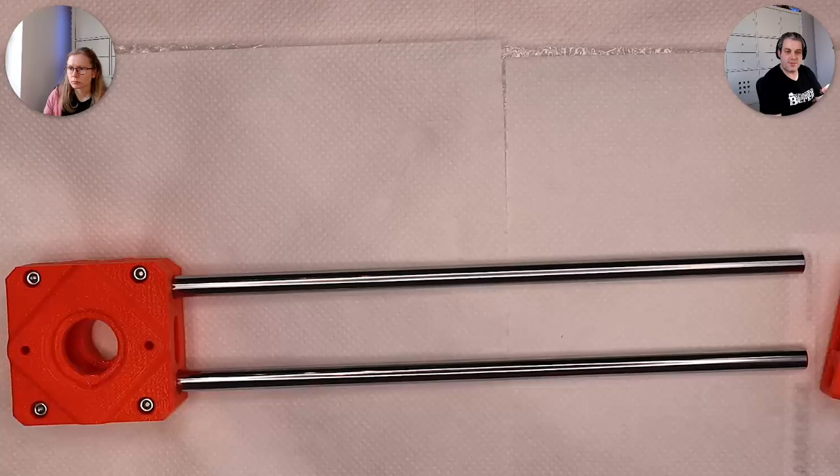Okay, so slide one bearing on each smooth rod. Where should the marking be? Do they say that? First, let's go through all the steps so we can understand. The instructions don't say at the beginning. Let's see about the marking - that was blue, and there's nothing about the marking. Can we check the next one? Can you just switch back?

Because I wonder what was the purpose of the markings, or do I just align it and that's it. Look, so the smooth rod inserted all the way - sorry, didn't hear. Just have to make sure it's all the way in. If the rod is not fully in, try using more force to push. Do not use a hammer.

Well, at this point I'm just really... I can scroll here. Okay, so it's later - here it will be important, properly aligned. Okay, but wait, can you go back? Can you go back?

Because I can work ahead of time and just have it positioned already like this. So are you killing the fun? No, because I don't want to keep turning this one and applying pressure on it. But I don't know which side is which - is it symmetrical? No, it's not symmetrical. I want to do this step ahead of time because then I don't need to apply any pressure on the bearings later. So I do have the marking facing upwards, and I'm going to slide it like this.

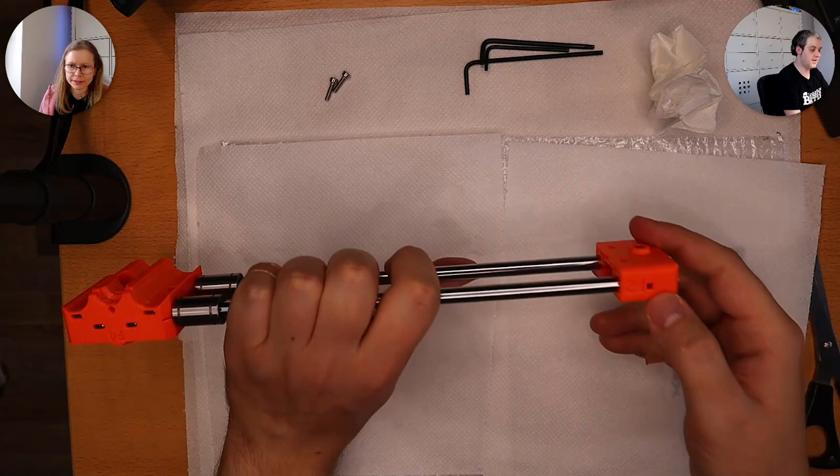Do not use the hammer. How can I check if they're all the way in? Oh, these little holes here. Yeah, okay, well they're nowhere near, I can tell you that much. So I need to keep pushing.

Oh, that was just the bubble wrap. It's just the bubble wrap. Yeah, I need to push it quite hard, because otherwise -- yeah, that's the reason why they say not to use a hammer. And it's still not all the way in.

It's close, but yep, now they're good on both sides. So let me just show you. You see the rod here, rod over there, and they're all the way in.

Okay, so check the correct orientation of the parts. The screw holes on the MINI-X-end must face up, and the screws on the mini Z carriage front must face up. What, I don't get it. So, should it be up? No, it's good. You're sure? Can you enhance it?

Okay, so the square shapey part -- no, the screw holes. Yeah, and there are no screws in here. Can you please turn it upside down so we can make sure that this is nothing like it -- completely different? Yeah, completely different. Okay, so this is right.

Okay, so then what's the next step? Just put in the screws. Oh, these two M3s, right here. Mm-hmm. Okay, that's easy.

But it's strange that they tell you to screw it and then the next step is to check if it's all the way in. I would do it as we did -- first check and then. Yeah, that one makes more sense.

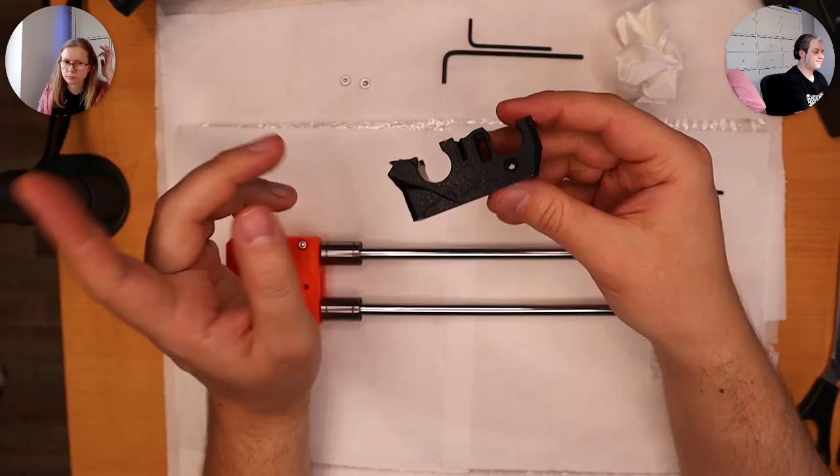All right, so the hexagonal one goes over here, like this. I think it's in the right place already. I don't think I need to do the screw pulling thing. Of course, do it.

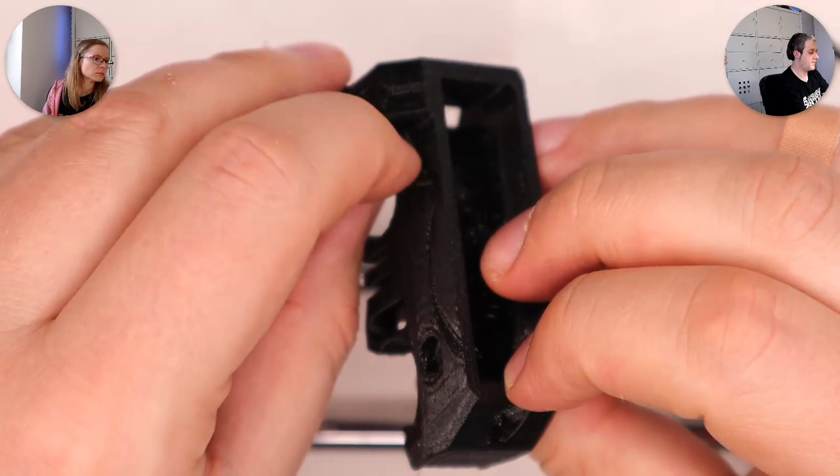And the next one is kind of tricky. It's over here, I think it's barely visible, and it's gonna be pretty difficult to insert this one. We're working on it. So I need to insert this somehow.

I think the music became quite... I'm just going to add a little bit of volume to it. Yep, I like it this way.

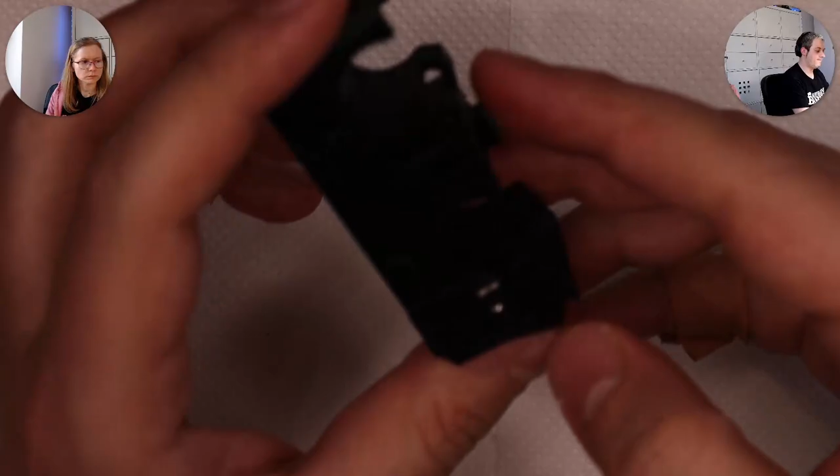Alrighty, so I need to position this now so it aligns with the hole. Can I push it with the Torx, or push it with the Torx? I think this is the right way. Well, I think I got the position right. You can see the little metal shining there. So yep, got it, okay. So here comes the tricky part.

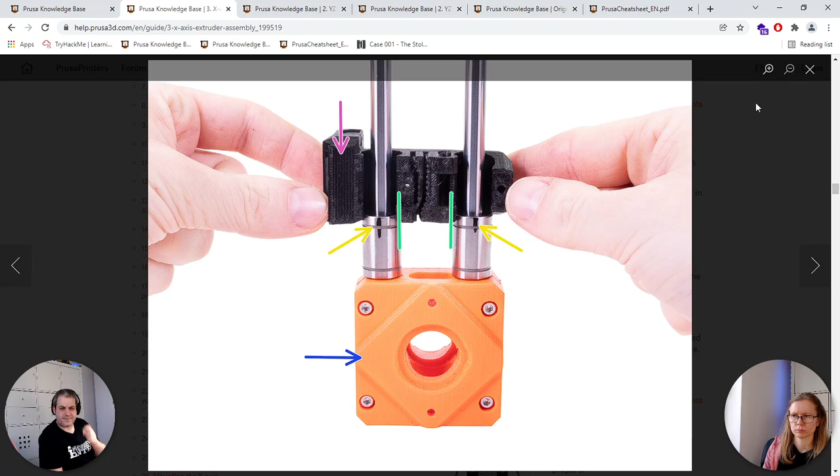Okay, so align both bearings with the markings facing you. I already have that one. Okay. Place the x-axis with the screw heads in the Mini Z carriage facing you. Take the Mini X carriage and place it above the bearings. Make sure the longest side of the part is on the left side. Align the cutout in the part against the bearings.

Push the Mini X carriage onto the bearings, ensure the bearings are properly... No, you're not switching the picture still. Whenever you see a different color that is not on the picture, I need to see the next step.

Okay, so push it on, yeah. And then they will move together. Ensure that they're aligned, bearings are properly seated and they are centered. Okay, okay, and the floor is yours.

This is probably going to be way more difficult than it seems. So this one facing upwards, right, from one, and these are the bearings. So have them here, and I need to slide it on them, or what does it say? Like this, right? Yes, I just slide it on top of them. It will look like this at the end.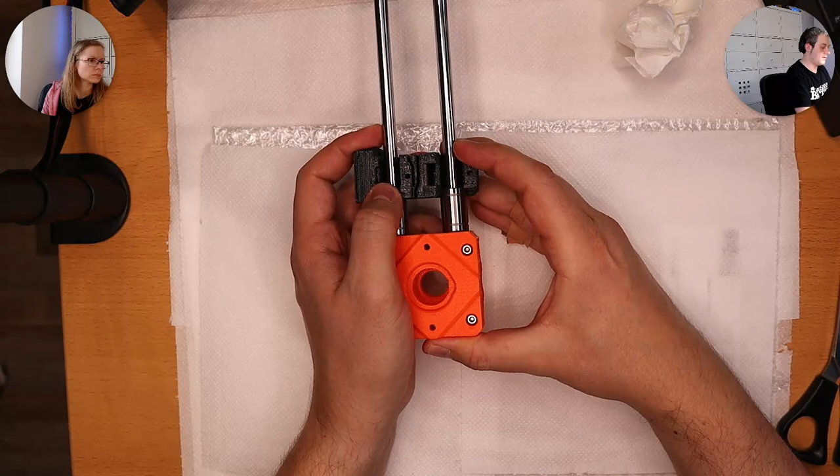Break it. Jeez. Yeah, it's not very reassuring. No, it's horrible. I think this one is, and I already...

Let me just read the comments. Go ahead, I'm going to. Easy going, this... but am I the only one here spending 10 minutes getting excess grease off the rods?

I lubricated according to spec, but there is always some lubricant ring remaining. Will this hamper the printer operation later? This is my first build. Hello, some grease normally accumulates close to the two extremities of the rods. It's enough to clean it every now and then.

Before pushing the Mini X carriage onto the bearings, triple check everything. After putting it, the bearings will not simply slide out, they will be locked in place. Make sure everything is centered, right side, everything.

My M3NS nut fell out while I was putting the bearings into the carriage. While trying to remove the carriage from the bearings, it snapped. How do I go about ordering another carriage? This was a gift and I don't have the order number. Make a Prusa account and contact the support.

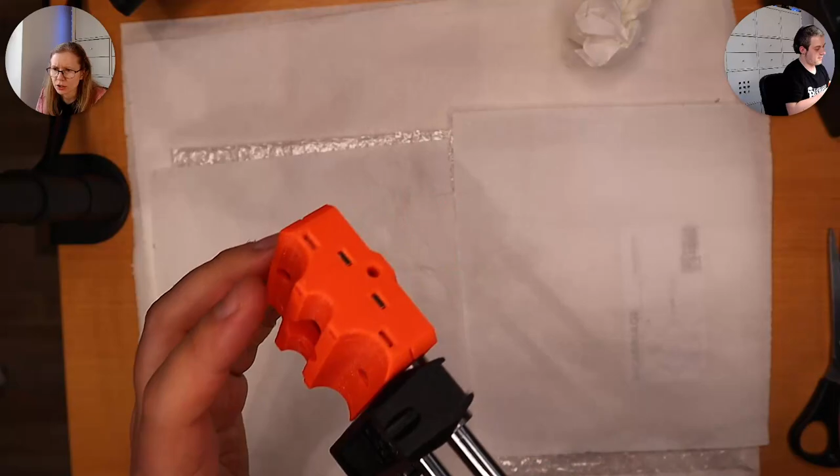After fitting the bearings into the X carriage, they no longer move smoothly. I have tried to loosen all the screws to see if this gives enough slop to fix, but no luck. I'm sorry to hear this. Do the bearings alone move smoothly? Does lubricating them make a difference? Can you link the issue to the printer parts having a defect causing the bearings not being collinear, or the rods not having the correct spacing, or something like that? I found that using the wrench is a great way to push the bearings into the slots.

I think I've done it. Oh wonderful. So I'm still checking the alignment, but I think it's also pretty good. They move smoothly. Oh, I have the markings so nice, in the right place. And it does feel like it's aligned. Wonderful.

And it's, but now the lubricant, yeah, is everywhere. So you can clean it every now and then, that's the instruction. I'm not going to push them too much, but yeah, this you should bring it up. Where to? Is there a position that they require? I don't know, this is what we can see in the picture. It is everywhere.

Which is not a problem, it has to be there probably. I go and pick the X-axis motor. I have some of the cable and such on top of it. You can just drop it on those, those are empty.

So I'm pretty happy with this one. I think we got the right position, light alignment for this.

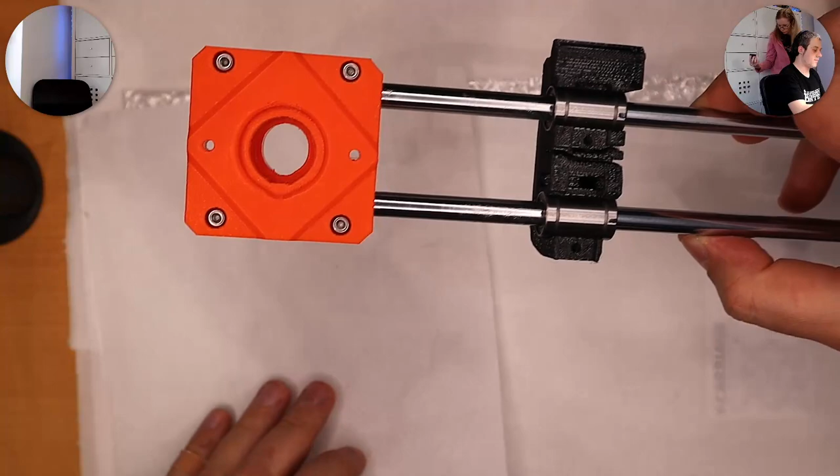What was the name of the boat model again? Benchy. Benchy, that's the 3D one. So we have, I can't wait to use the isopropyl to wipe off the markings, it really makes my eyes tick.

Okay, so x-axis motor, pulley, x-axis belt.

No, it's not the belt. I think we need to use the wrench method again. But where's the belt? I think it's there, yeah, see it? Or but here. Maybe.

Isn't that in the extruder? I didn't see it, no, in the bag. Yes, you put it. I will double check it. Check it again please, because I'm pretty sure it's there. These are just for the motors. You can double check it as well, but I don't see the belt in this.

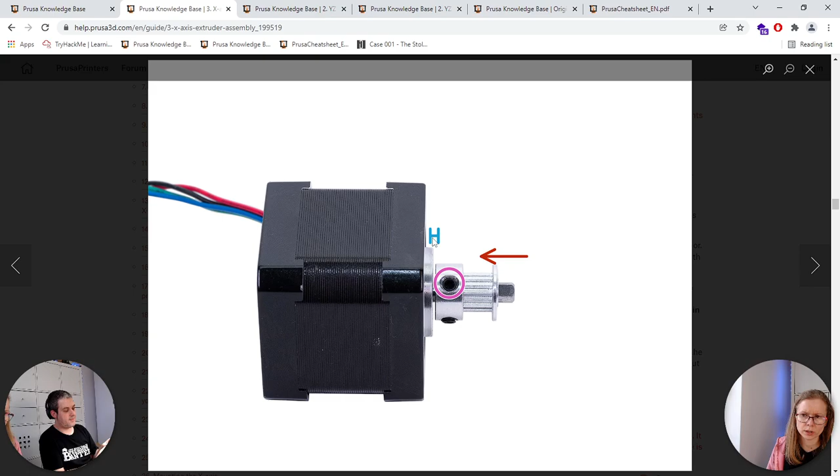This distance, yeah, no, I think this one goes all the way in, but in the other... Okay, no, look, here there is something, so let me read it. Okay, but I think it goes all the way. Don't press the pulley against the motor, leave a gap of 1 millimeter between both parts.

But then why are they showing it? There is mentioned a 2 millimeter gap in the earlier version of the manual. Please use the value mentioned in the current manual.

But how do we measure it with the wrench? No, even better, how do you measure 1 millimeter? It's like barely touching, okay. I'll place it so that it's barely touching.

Okay, so one of the screws must be facing directly against the flat part on the shaft. Tighten the first screw gently but firm. Then turn the shaft and slightly tighten the second screw. Ensure you have the correct orientation of the pulley on the shaft. It can be placed both ways, but only one is correct.

Yeah, okay, so... Can you enhance the picture for me? And I'll give the floor. Okay, so I need to find the flat part, right? It's the first step here.

Yes, so this motor rod has a flat part, that's over here. You can see it as the reflection of the light changes on it. So this is flat. And then what, I should position it a bit facing towards me, like this, right?

Yeah, like in, I don't know, 45 degrees. You can see it here. I think it looks good, oh, ish, like okay, it's not 45 exactly, but yeah.

So if it fits in here, yeah, this is probably even too much. I'll do it like this. I don't think you have to be super precise with this because the belt has some room.

And then I tighten it with the screws that you gave me, right? No, these screws are inside. How do I tighten? Oh, I just reach in. Right? This one? Yeah, now I remember. What was it, the y-axis?

And then I turn and do the same thing for the other one, right? Once one of the screws must be facing directly against the flat part on the shaft, tighten the first screw gently but firm. Turn the shaft and slightly tighten the second - oops. Then I'm just unscrewing it instead of screwing it in. Turn the shaft and slightly tighten the second. I think it's done.

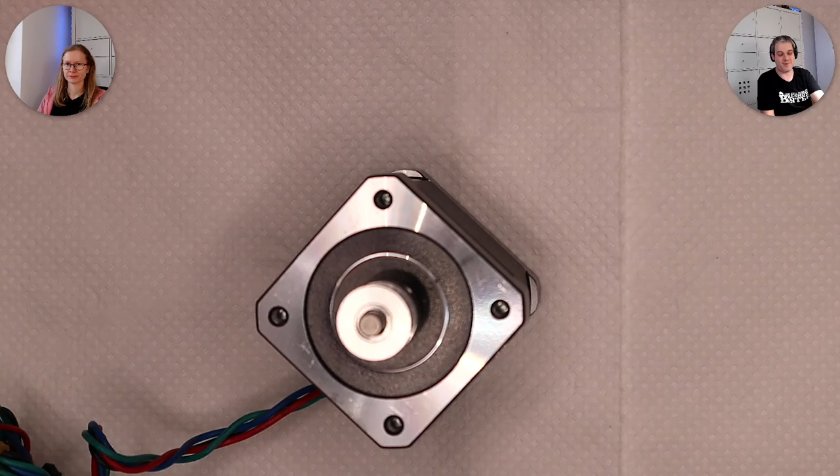That's awesome. And you must have pretty good mobile connectivity there. I'm really surprised, when we go out for a walk in the forest, most places the 4G coverage is stellar. I probably shouldn't say that because someone might be from the same group of people, but we went out for a walk and followed the stream at the beginning. Towards the end we didn't want to miss it, and we did the same thing, walking in the forest, and I had one earphone in there, and I was able to follow it, so it was pretty good.

Yes, most places 4G is more than decent. And how's 5G coming along there? I don't know what's the situation here, I think they're only testing it, right? It's not deployed. We have a couple of 5G capable mobiles, we could check. We all have 5G now. Yes, we all have 5G. The reception will be fantastic for that one.

I'm not sure what's their plan to roll out the different technologies. Yeah, but they shut off the 2G one, I think 3G is also going away. But 4G and 5G, they're different frequencies, so for 5G you need a lot more antennas. No, we're just kidding, I think this is the reason of the resistance. Yeah, because people see the antennas. Yeah, so it's higher frequency, which will give better data.

Finland is doing good on 5G. I hope to get my home network to 5G soon. Wow, yeah, no, it's pretty amazing, like what I saw on measurements where they deployed it, and they have at least a pilot application. It's amazing, I saw someone in the US near their home, they had 5G coverage, it's better than what we have for fiber now. It's like they have 2 gigabytes per sec speeds on wireless. That's pretty amazing.

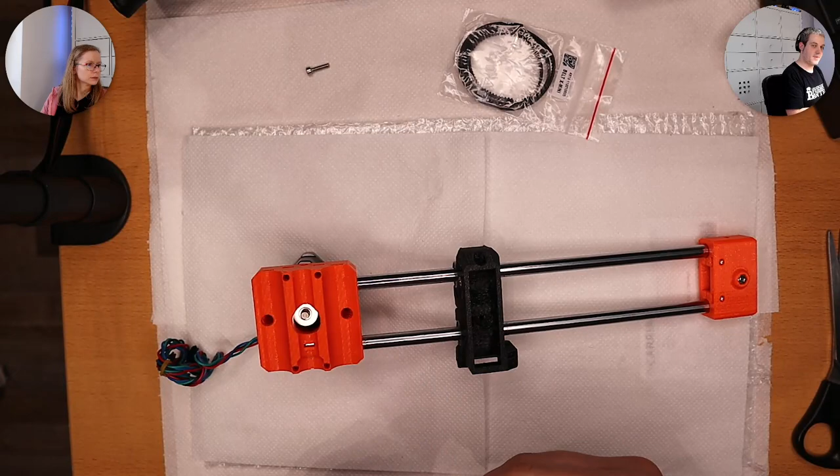I think so. No? Something has to. You give me two of these. Yes, can you please show me? Okay, yeah, there, that's correct. And the motor has like, yeah, they are at an angle. Okay, looks good.

We just had someone ask us what we're going to print first. Mikey from Costa Rica said he would print something very sophisticated, but I really just want to have Benchy in one piece, hopefully not distorted too much. Benchy is this little boat, it's like the Hello World of 3D printing, and I want to print that one to see if it works.

Or maybe a very simple case. I have a couple of developer boards lying around here, and it's about time to get their case. We also have the Pwnagotchi and the Pi Sniffer, cases for that one. Pi Sugar has a design for a case, so I'm thinking about printing the Pi Sugar one.

I think I got this. It's tight, it's nice. So, okay, wonderful. What's next? Oh, it's the belt part.

So it says to place the x-axis like in the picture. No, it's the other way around. No, please turn it upside down. No, this is... it's like this. No, oh no, it's not. Yep, thank you, because it's so similar. Okay, you're right, sorry.

Cool, that's my understanding. Can you lower the volume on that one? I can hear myself back. Just lower it to like 10. Yeah, thank you, it's just that hissing sound that I keep hearing back.

All right, so it's the belt, and they say that piece, yeah. I should go from this side, right? Like this. Yes, let me just push it in. Look at this, you have to squeeze it in. Yeah, just like before. I'm just going to put this one a bit closer to myself.

Do you want me to zoom in so you can see? Yeah, because we cannot see. I'll show it afterwards once I have it in position, because I cannot get under the camera and squeeze it in at the same time. So be a bit patient while I'm doing this, the belt is a bit delicate, so I don't want to push it too much before I have this.

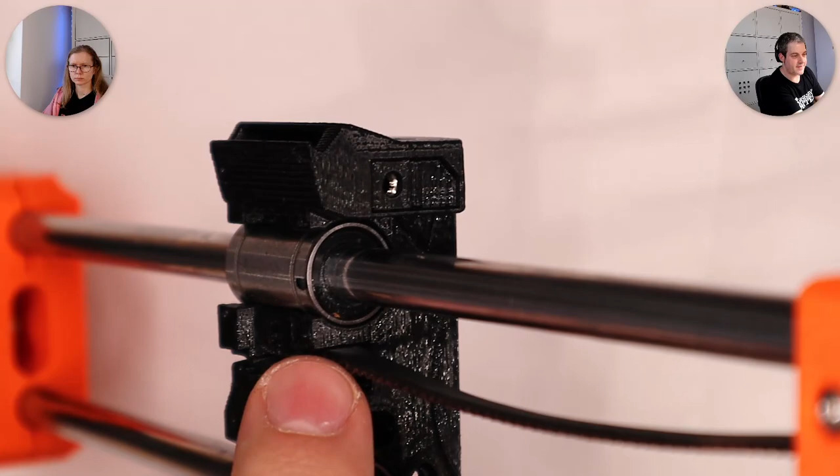I think we're getting there, it's almost there. Right, let me show you what I did. So the belt is in the hole all the way in. If I move it a little bit like this, you can see it's not actually all the way in, it's kind of in the middle. We'll see if I have to push it, there's still some space here. But yeah, we'll position it afterwards.

Okay, next step is to loop it back like this. Ta-da. Not all the way? I'm not sure. It's all the way, take the second end of the belt and guide it around the pulley in the axis and through the hole. No look, we still have belt.

This part here, I can already tighten it up and push it in here. I'm not sure if you need to tighten. Oh, that's the other side. But here it doesn't look tight at all. Otherwise I won't be able to reach the other side. Yeah, the other side, so I need to push it in here, and this has to be sort of tight, not super tight, but if it's not tight enough...

Okay, I will just read these instructions. Before inserting the end of the belt into the lower groove on the X carriage, double check the belt and make sure nothing is in the way, like a screw or over the pulley. After you insert it, it's hard to remove to fix the length. My recommendation is to tighten the belt as much as you can by hand. I had problems once mounted because the X-axis test does not pass. This is because the belt is too long for tightening the belt. The side screws need to be turned. If you need many turns, the X-axis distance increases and causes problems in the self-test. Hope this helps, my belt lengths are fine.

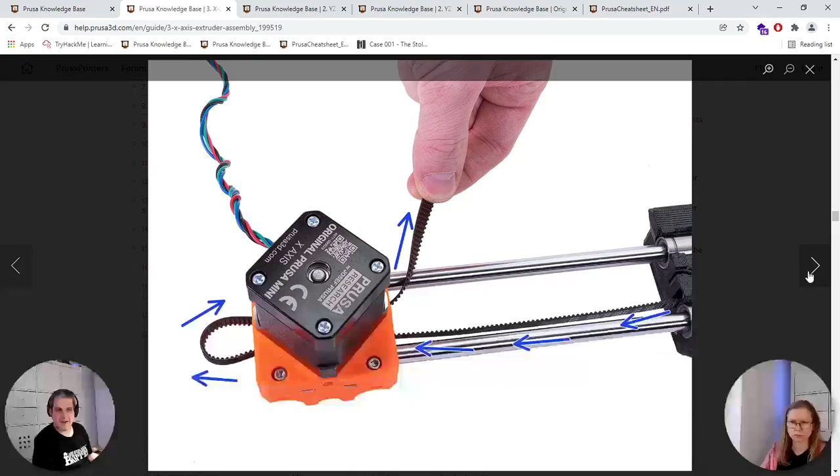I think I get the general idea, it's just hard for me to believe that it doesn't matter where I position it. This is how it... so that's what I said, I have to push this one in. Oh no wait, it goes through the hole. Yes, that totally makes sense now. Okay sorry, that's the part I was missing, I was like this is very confusing. Okay, because here in the middle I cannot fix it at this point. Okay, it will end in the middle. Look, yeah, no I got it, I understand.

Okay, so then I can switch back to you, just the last part. Here, like how am I supposed to get this one through here? Oh here, you mean? Yeah. It's just magic, it goes out and then comes back. Okay, I got it, so all the way out. Guide the belt around the X-axis motor pulley, there's a pulley inside. Insert the end of the belt into the lower groove on the X carriage. Secure both ends of the belt by squeezing them into the groove with the 1.5mm Allen key.

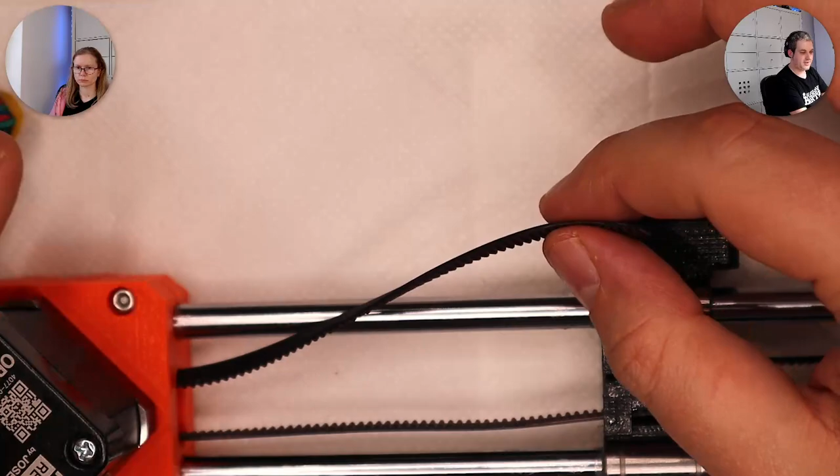Okay, so the belt thingy, and the problem is that the pulley already has the little teeth in there, and I need to tighten the belt up. So if I keep pulling these little pieces there will be friction inside here, and I want to be just careful as much as I can, but I really need to tighten this one up.

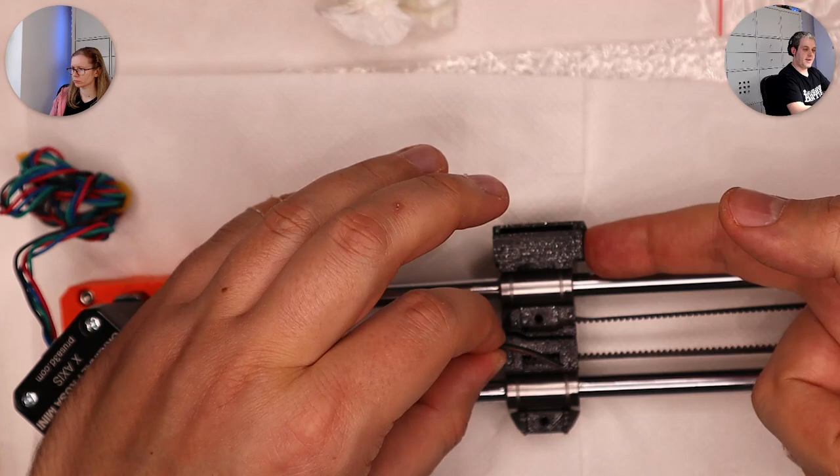I think I'm probably just going to push this one through. It says the belt may seem too loose, but we will adjust the correct tension later. I think I can get the tension almost perfect if I push this piece this direction, and then tighten up the belt like this.

I hope you understand the mechanics, so I don't need to pull on this side. This will do the trick - the belt moves that direction and it tightens up the whole thing.

So that's my idea. I'm going to put the belt in the hole like this. I'm pretty sure they use some sort of tightening process like this because I don't see any other way. Also, I think the orientation of the belt matters.

Pushing it in is challenging, to say the least. Come on. Right, we're getting there.

Pushing it on all sides, and then I will use the Torx again to adjust it and have it aligned pretty much with this one. But we'll have to do proper adjustments at the end, I think.